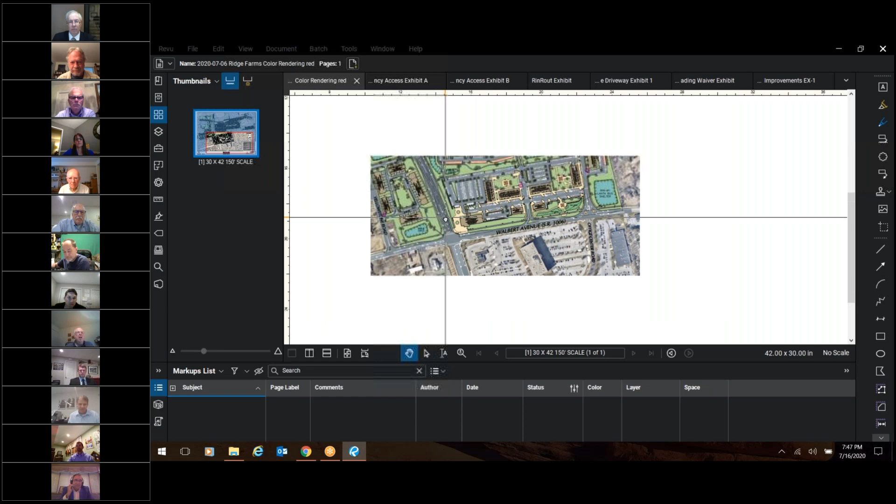I just want to mention a couple things about the history. Would it be possible for me to have control of the screen? Probably, okay, it looks like I have it. Okay, so the plan I'm bringing up is the same one that Tony walked through a bit.

So just a little on background. The last time, or the first time we were in front of you with the preliminary plan, was at your May 21st meeting. At that meeting, we reviewed a total of 8 waivers that were requested. The first 8 waivers in the letter are the same waivers. We've made some modifications to those based on your comments, but the same general sections, the same order that we presented back then.

Since that time, what we did is we went through the many comment letters that we received on our initial submission from Public Safety, Parks and Rec, and your multiple engineers, as well as listened to your comments and others. We reviewed those documents, went through everything. In those letters, there were some items that suggested waivers would be required in numerous places. In some cases, we figured out a way to make an alteration to the plan to avoid those.

The last 4, so the 4 that are after those 8 that make up the 12, those are items that we didn't believe we could make a modification to, or at least we prefer not to make a modification. We think the plan's better as proposed, and we added those to the list. That's how we ended up with 12.

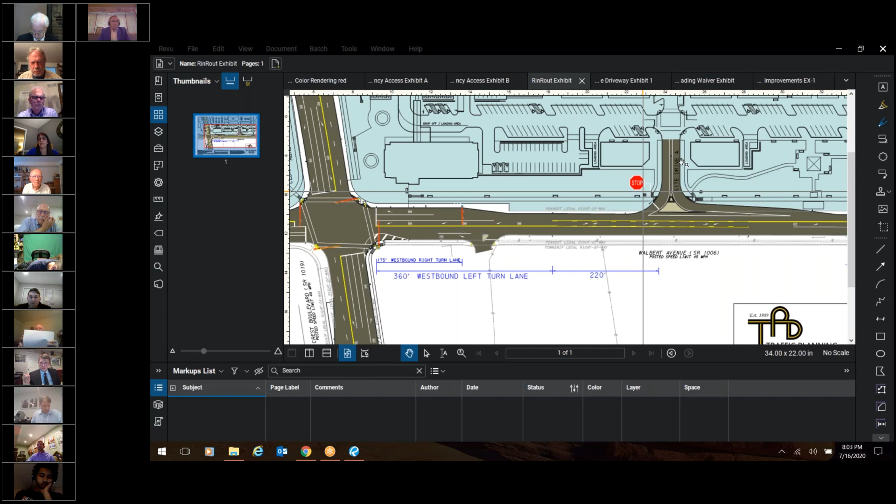Can you move this over, or are we allowed to see the following intersection there? We can get a full picture of what we're looking at. Sure, of course, thank you. Just take a minute to regenerate here. Put over a bit.

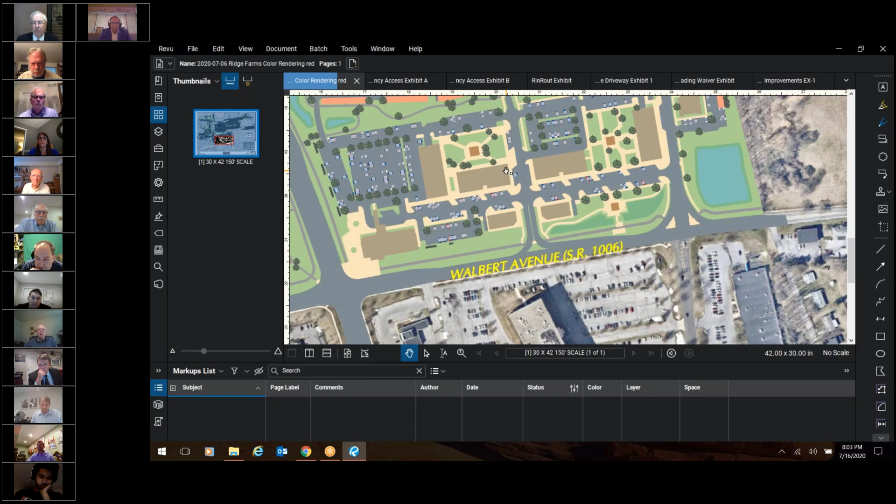So Office Center will be a signalized intersection. It basically splits the difference between the two, provides better access to those commercial buildings in the middle. That's correct. Better circulation. You've got about 1,450 feet total from the Office Center down to Cedar Crest.

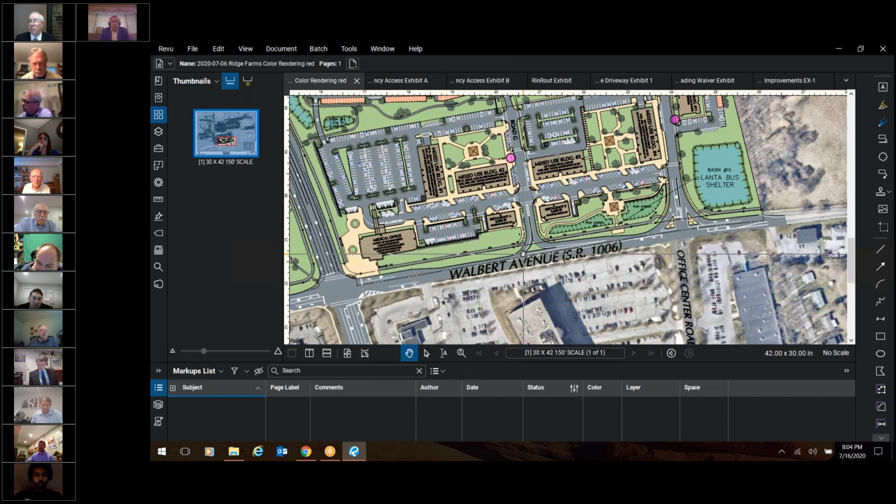And the location was chosen again. Originally it was a little closer to Cedar Crest, but there was a request to move it further east, which ultimately made sense with the traffic analysis that Rob did. Thank you.

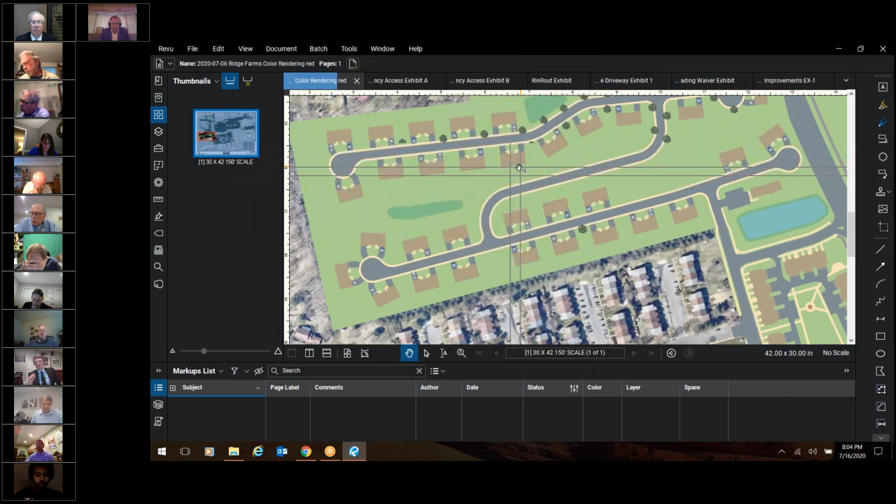Okay, so I'm going to move on if that's okay. As Tony described, items, our waivers 2 and 3 go together. We discussed those when I was here in May as well. They concern the length of, get it to regenerate here, the length of this cul-de-sac and the number of units associated with that.

At one point early on, when we presented early sketches, we had a connection out to Valley Forge Road, as was mentioned, and it goes back a few years now. There was a suggestion we probably shouldn't make that connection through. At the last meeting, we discussed that public safety had asked for an emergency access. I met with public safety recently, and they had asked me to look at whether or not an emergency access could be provided between the north and the south cul-de-sac, which would avoid any connection through to Valley Forge Road.

I think Tony had briefly brought up that exhibit that I shared. So there are some grade challenges here between these two cul-de-sac bulbs, but we did look at it enough today to know that we can make it work. It involves a few adjustments and probably adjusting the bulb grades a bit. But we feel comfortable we can make it work, whether it's through a direct connection the way I'm showing here, or a separate emergency access connection that would run through the center open space area. But it would still not have more than 400 feet of bulb length.

Generally, when you have a cul-de-sac longer, the reason why that section is usually in place concerns if you had a fire and it would block off access. So by having the emergency access connection provided, that usually addresses that issue. So I would think that we would look to try to incorporate the access I'm showing now in Exhibit A, but that's the intent, to address that concern.

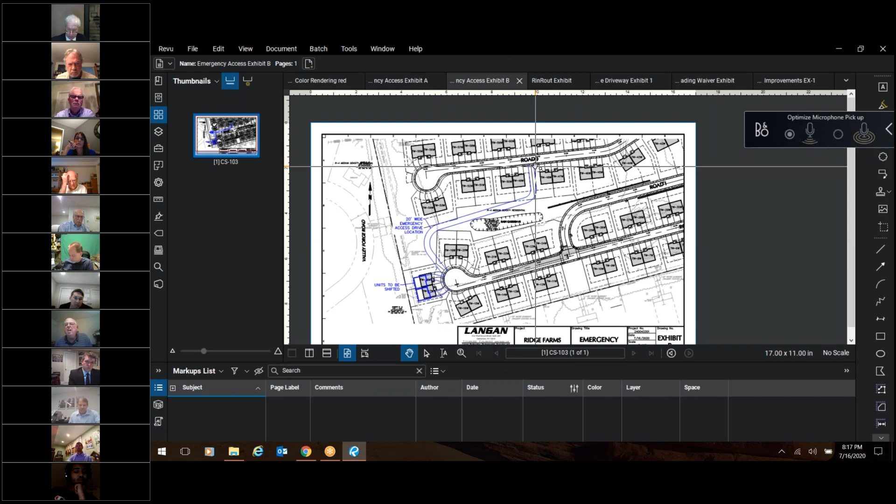If you didn't allow the waiver, I guess we would probably initially look at seeing if we can make a permanent connection to Valley Forge Road, which there was resistance to originally, or look at an alternate way to approach.

What about bringing that road in the middle there to connect those two, I'm sorry, I can't read it. To Road H? Yes. Let me go to the bigger plan. Bear with me for one second.

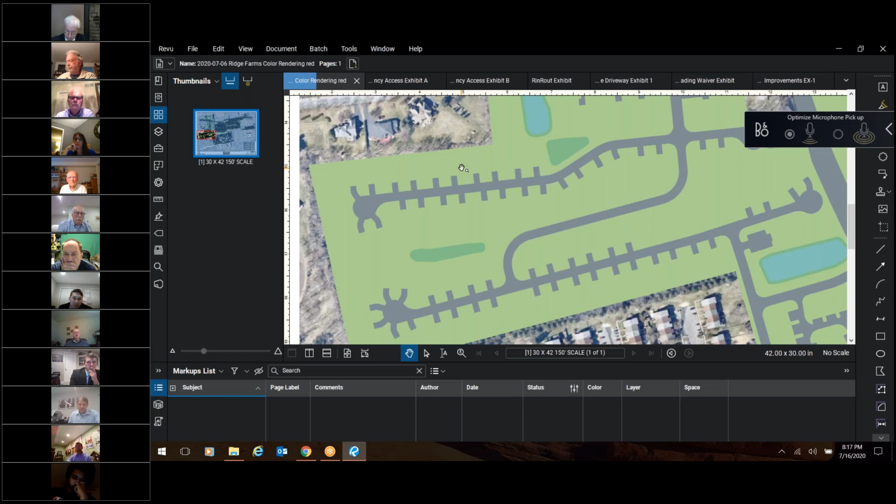Okay, so you're saying this road? Right, if that were to connect to both of those, road H and J, to make an intersection across there. Again, you have the same grade issue. The reason this road is as long as it is and routed the way it is, is to catch grade. So you need this length of road to address the grade condition.

And what grade is that road? I don't recall exactly, but it meets the ordinance. I don't know if it was 6% or 7%, but it wasn't more than 7%, which is what's permitted.

So should I move on to the next one? Yes, thank you. Okay, thank you, so that was 2 and 3.

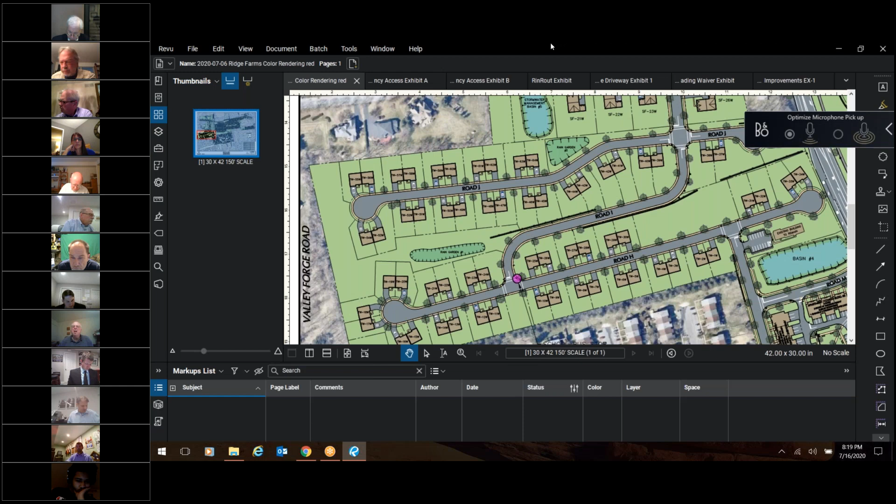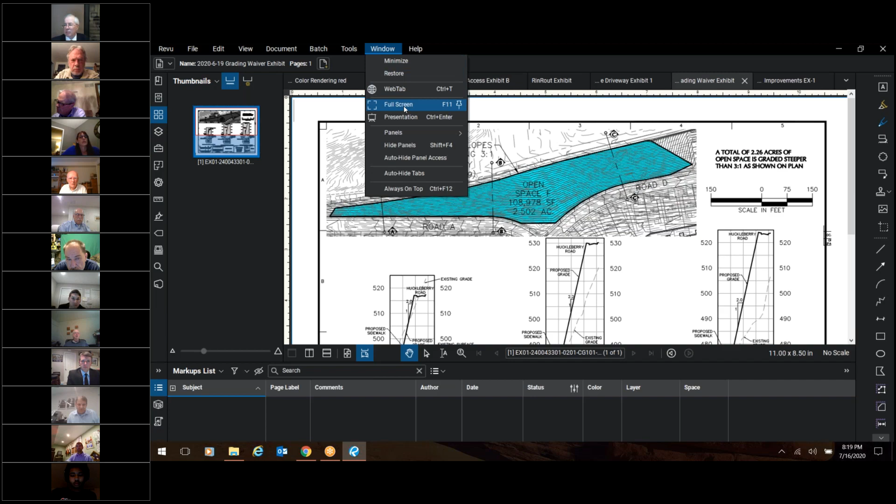Number 4 was the grading waiver. There was an exhibit that Tony didn't get an opportunity to present. So let's see if I can make this a little smaller, it's difficult. Go full screen. Okay, so there's a grading waiver requested.

There's an area of open space that had been discussed before. The ordinance talks about a 3-to-1 slope. We're requesting allowance to let us grade this at a 2-to-1 slope. It's about 2 acres of area total.

The geotechnical engineer had asked me to identify the area closer and provide some cross sections, which I did. The existing grade in this area is roughly 2-to-1. So if you drove out there today, depending on where you were on the slope, it varies a bit, but you can see in this section it's roughly 2-to-1.

So, you know, this is a situation - it's not an uncommon condition to grade at 2-to-1. There's a certain type of slope matting you need to provide. Your engineers may ask me to do some sort of stability analysis to confirm it will be stable.

The open space will be planted in a way that won't require a great deal of maintenance, because whether it's a 3-to-1 or a 2-to-1, you're not going to put a lawnmower on it. It'll be planted with something that stays in place and requires minimal maintenance, and it'll be on the homeowner association to maintain it.

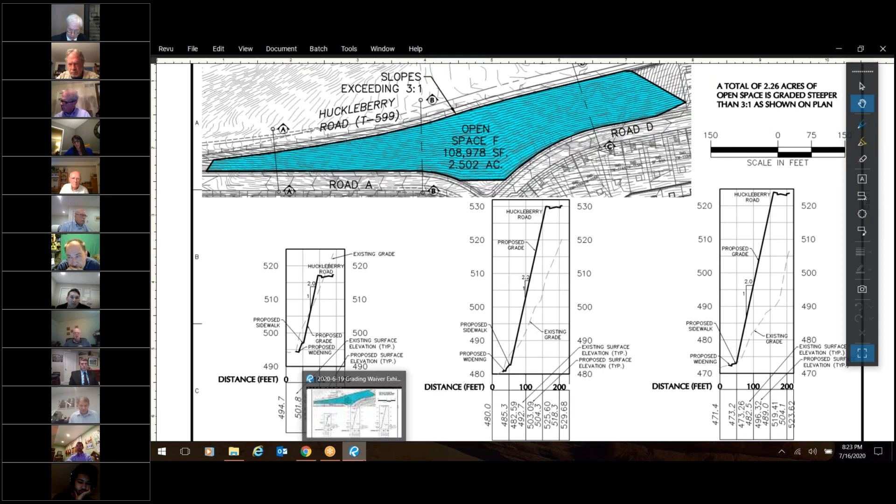So, yeah, okay. Okay, good. Okay, so I'm going to move on to the next one, if I can figure out how to go back here.

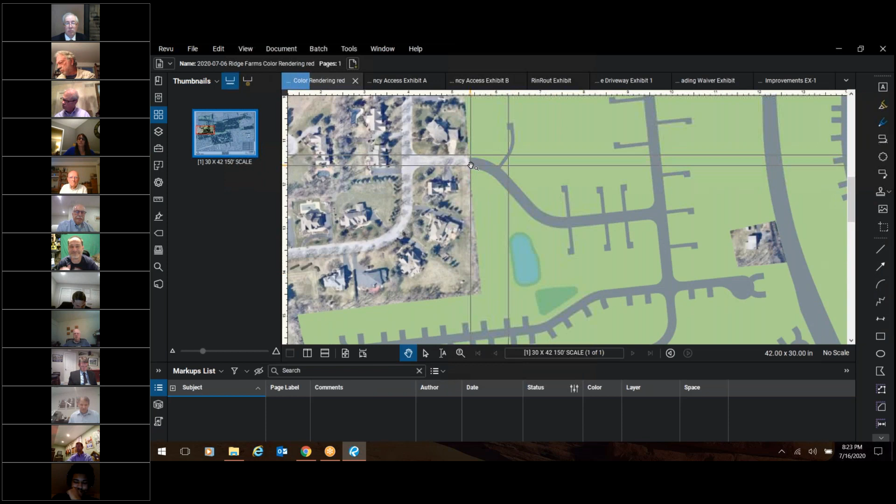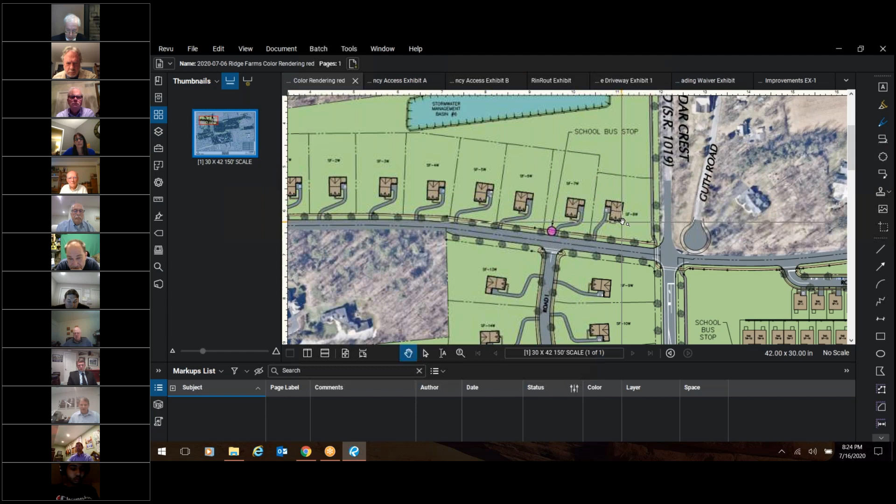Please bear with me. So the next one concerns Huckleberry Road and the west side of Huckleberry, and the improvements on the west side. The history there was the original plan submission I made in March. We had asked for a waiver from improvements of Huckleberry on the west side. We were on the east side, widening the full 4,000 feet, adding curbing and sidewalk. On the west side, we had originally asked for a waiver from improvements here, with the exception of providing sidewalk on the north side, mainly because there's not a great deal of traffic being added here. These are larger lots and not a lot of density in this area.

When we talked at that meeting, you had come back and said that you did want widening through this area, that you felt it was necessary. And we spent a little time talking about it because, I'm sure there's a reason for it, but east of Cedar Crest, this is a collector road. Everything west is considered an arterial, and I can't quite figure out why. Driving Huckleberry, knowing it's a 24-foot wide rural road, I wouldn't think you'd want it ultimately to look like Walbert.

But we went back and forth on this a bit, and ultimately what we came up with was what we put in the updated waiver letter, which was trying to accommodate what you were suggesting and provide a reasonable improvement here. So we provided the 40-foot width, the full right-of-way dedication should you ever want to make it wider, the sidewalk on the north side, the curbing, the stormwater.

So the waiver request really is two things that remain. One is to leave it at 40 feet - so it's 24-ish now, you get 40 foot of width here. And even at 40 feet, we're going to have to figure out how to make best use of that much pavement, so you don't have some of those safety concerns you were talking about before.

And then the other piece of this is the sidewalk on the south side, which, at least from the new roadway to the west, it didn't seem like there was a logical connection of sidewalk to the west. As we've been talking about this, maybe on the east side it makes some sense, but that's where that stands. So I'll let you guys discuss that.

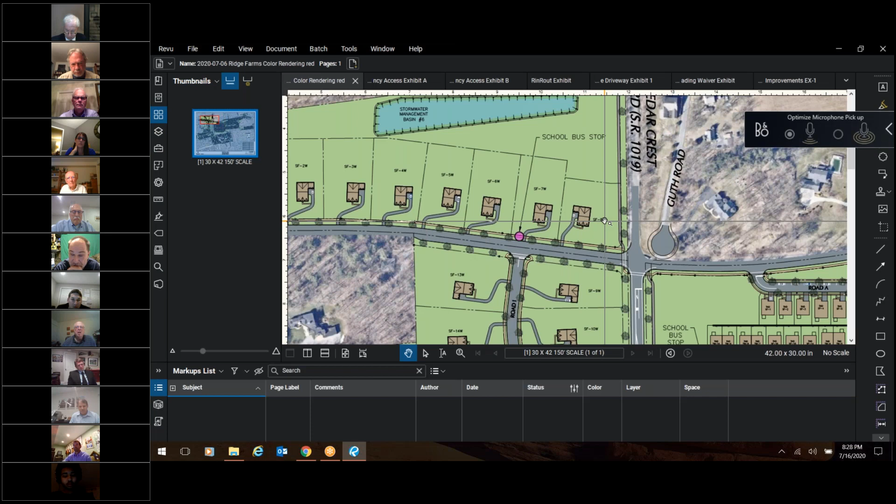So to build it to our standards, arterial, that would be 50 feet. I could see an argument for 40 feet just because of the location of the school bus stop and the children from the south having to cross that road to get to that bus stop. I could see parents being very concerned at even 40 feet, but at 50 feet, I wouldn't want my child crossing that road, and I don't have any children. So I could see a good argument for 40 feet, especially considering it's collector on the east portion, east of Cedar Crest.

This intersection at Cedar Crest will have a traffic signal. Yes, it's being reprofiled to improve the grade and the sight distance, and the signal's being added. So I also added this trail network along the property limit since you last saw it.

Will that trail be alongside the sidewalk then? The trail is independent, it's interior, further interior. A trail was something that Greg Adams had in his comment letter, so that you could extend it further in the future.

This is the thing you call an 8-foot wide walking path? Yes, that would just be north of Huckleberry. No, it actually extends on the entire east side of the property, so you can come down to the intersection. It'll be signalized, you have crosswalks, and then it'll enter the property and continue all the way down to the east.

Okay, so throughout the entire site, on the other side of Cedar Crest?

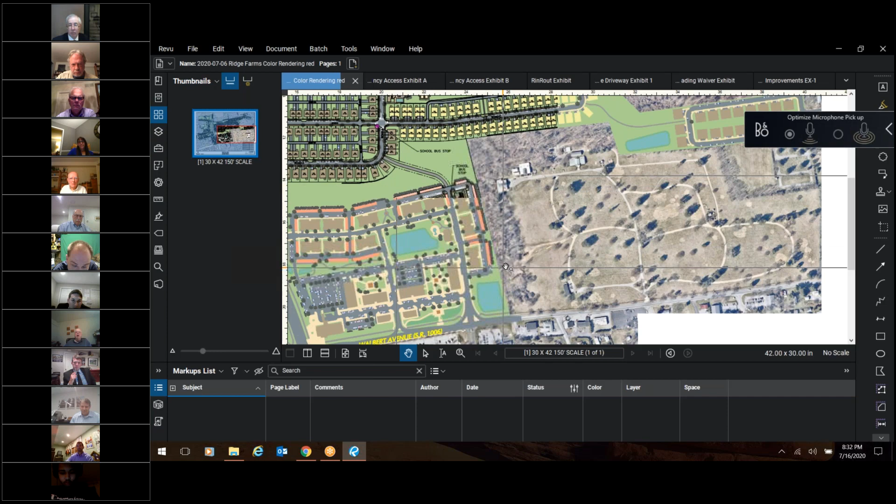So at your eastern boundary to Grandview Cemetery, where the two properties meet, you have a walking path going - is it going to connect into the sidewalk there that's currently in front of Grandview, like right behind, right in there? Yeah, that's the intention. So then Grandview Cemetery, who we've been going back and forth with on the condition of that sidewalk, they could say, well, we're going to rip the sidewalk out and pave it as asphalt to match your project. And I don't know if that's something we're really looking for, but that's just my opinion.

Brian, that's kind of a separate issue. We already have an open land development for that cemetery that does require some frontage improvements there. And we also have the Abatia project, which has been on hold, but that's another one where we can get improvements there. So I'm not quite sure that the cemetery can simply say, well, we're going to put in asphalt.

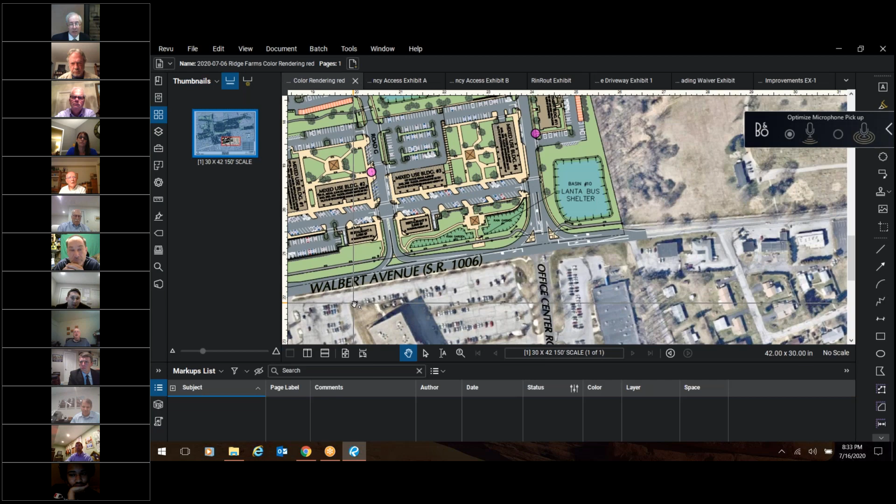That's a different animal. I just get concerned about the asphalt not holding up over time, and then it deteriorates. Right, especially if the HOA is responsible for it. Sorry Dave, but Greg, do we have any other walking paths in the township that are of this construction?

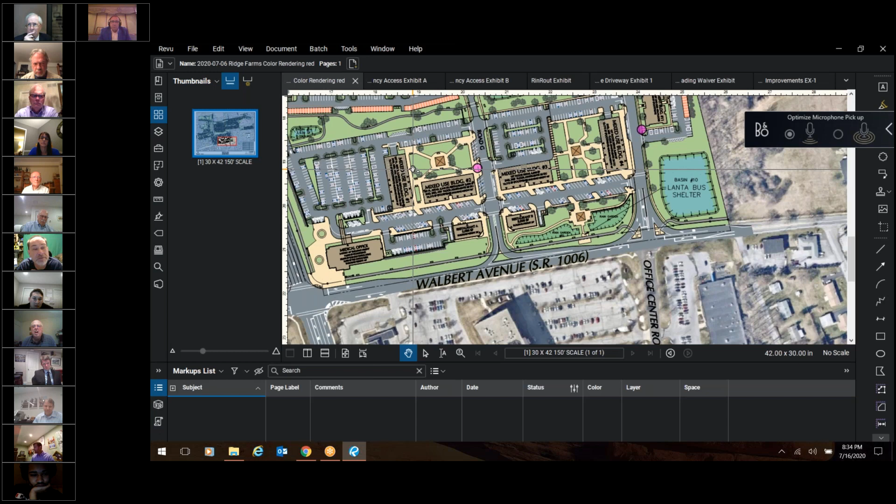I can't think of any. I remember the Cetronia ambulance wanted to try to do that, and we decided against it. We wanted a continuation of concrete from the underpass of 309 there. Yeah, right, that's the only spot in our township we've allowed this. That's all sidewalk through there, so that's all concrete. Wow.

I don't want to say no. Right, neither do I, that's why I asked. I could only offer that I know there's township details for the trail we were asked to follow. Were we not promised a walking path around the park on Broadway where the ambulances are located and where that wonderful new building is built? Yes, that's the case. That is on their property.

Right, and we were promised asphalt walking paths. That phase has not come to fruition yet. Because that's part of the Lehigh County fields and that kind of stuff, isn't it? Yeah, that's internal to their project. It's not within the right of way per se, or along a frontage of road, not along Broadway. We put Portland cement in there, or concrete, I should say. But Brian, I believe the walking paths were meant to be in lieu of sidewalk along Broadway.

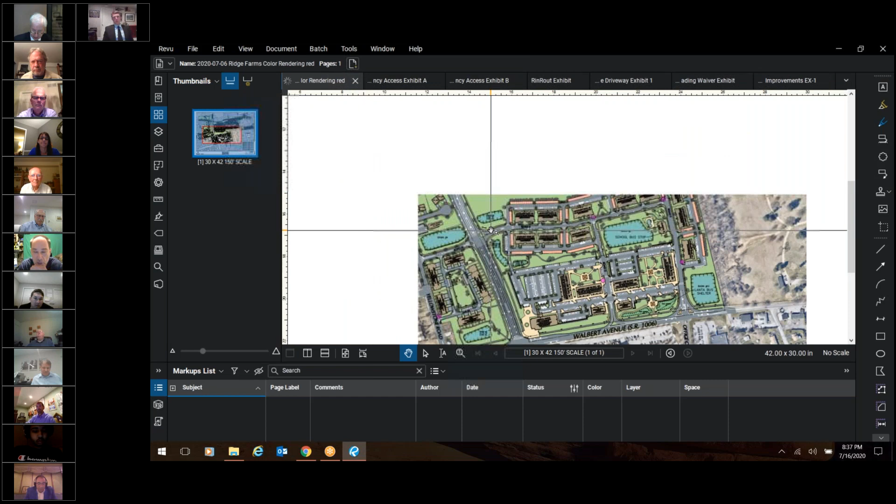Okay, so just to jump back to the waivers. Are we done with the Huckleberry waiver on the road width? I'll move on to the next one.

Okay, so the next three all relate to stormwater. I know Tony touched on them before. I think the easiest one to get out of the way is the issue of a flat bottom basin. Tony and I were talking about this today, and honestly, there's a code section that requires a 2% slope on the bottom of a basin, which is a fairly common code section that most ordinances have pulled out at this point. Although I still have to ask for the waiver often because it's not all of them.

So the old grass-lined stormwater basins from 20 years ago had a slope to the bottom, they were just mowed out basins, there for peak rate only. These days, whether it's an infiltration facility, which these are, or a wet pond, or a wetlands planted bottom basin that all provide water quality elements, they all need to be flat bottom. So it's a fairly common practice, and again, it's not uncommon that I have to ask for the waiver because a lot of ordinances still have that requirement in it.

But there were some questions on the geotech on all three of these. Their questions really dealt with infiltration capability, but the physical structure of the basin, having the bottom be level, I wouldn't think would really tie to that to a great extent. Well, it's actually typically required and recommended that it's flat for infiltration facilities.

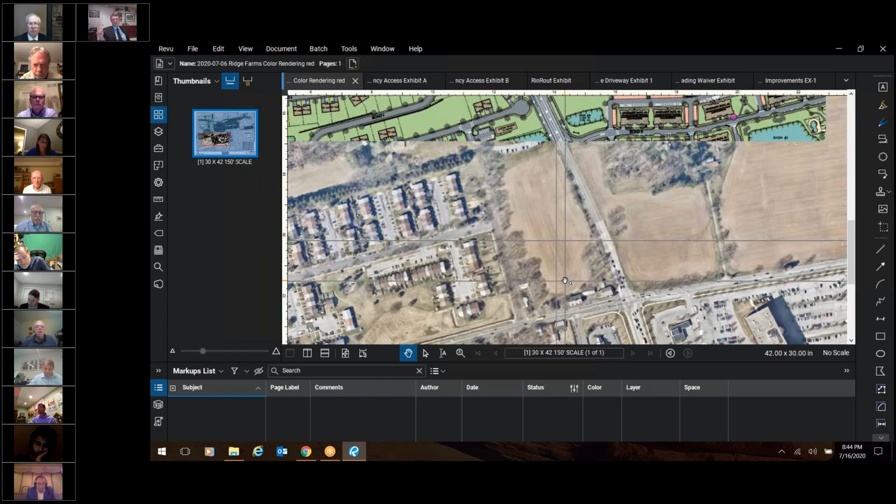In which particular basin was that? Basin 3. Now, I can tell you where basin 3 is. I think basin 3 is down in... closest to Walbert, I think. Yes. Basin 3. That's the deepest one, potentially the deepest one. Thank you - corresponding depth.

In terms of maintenance, some of these ponds are pretty big, and after some time you do need to perform maintenance, and you may need to get some equipment down there. I just have a concern that when the HOA is left to maintain these basins, and then 5 years down the road they need to get a machine down there to clear out some stuff, they can't get down the 3-to-1 slopes.

Yeah, we'll grade in an access way so they can get equipment in there if they need to. We'll have an area that's flatter than that so they can get equipment in, although the intent is not to bring in equipment very often, we'll give them the ability to do that.

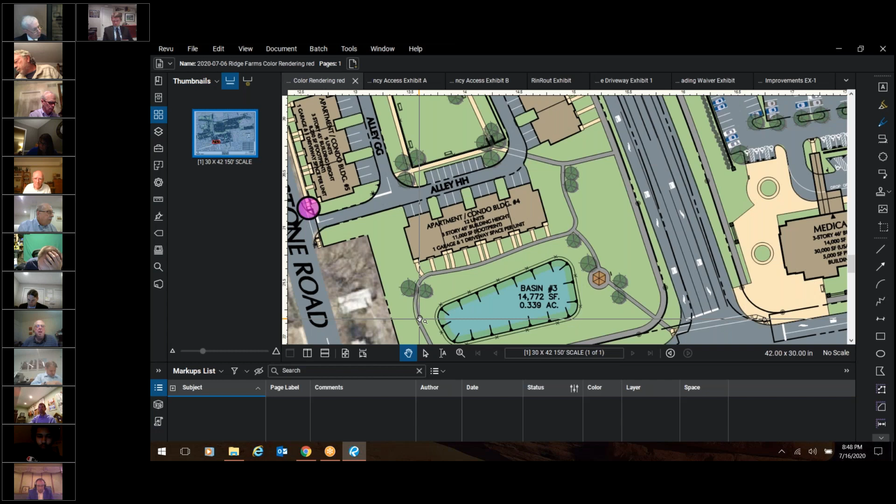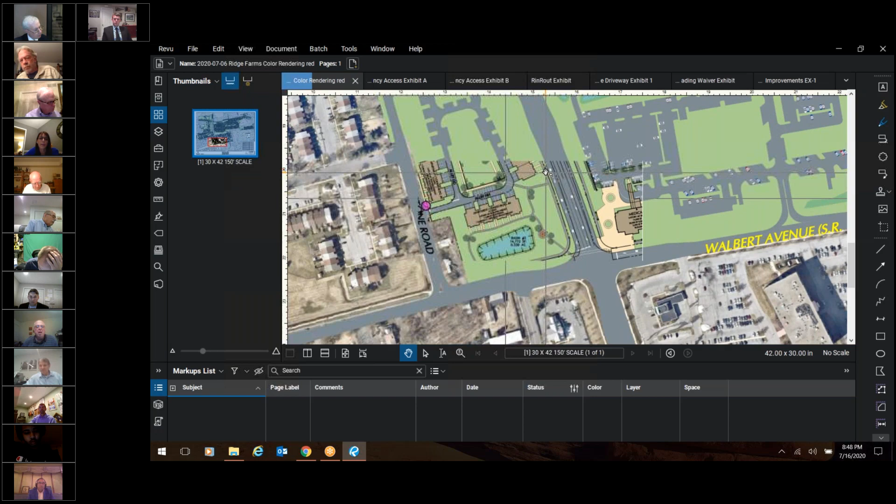This is on page 102 in our document. Yes. Basin 9 is 48 inches total. So that would be another one that's close. Can you give us a close-up of that one as well? Yes. And figure out where it is.

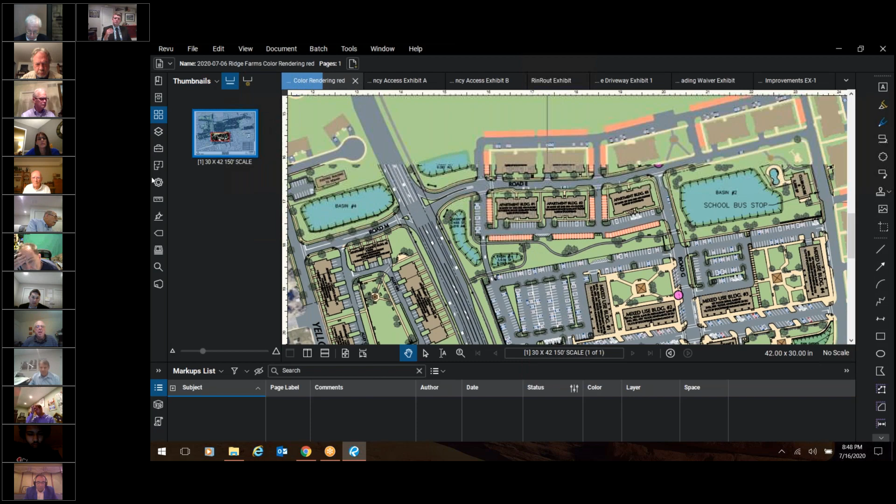Basin 9 is down the hill behind the cemetery. Okay, and that one's 48 inches. Yes, 4 feet in the 10-year storm. 48 inches, yeah. Okay, and they're listed there. And then the next one is 40.7, about 41 inches. Yeah, they progressively drop from there. Basin 4. Okay.

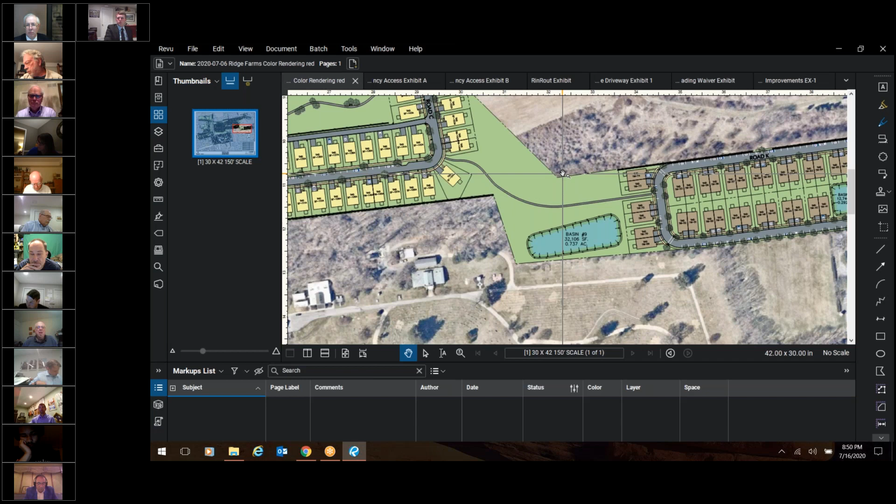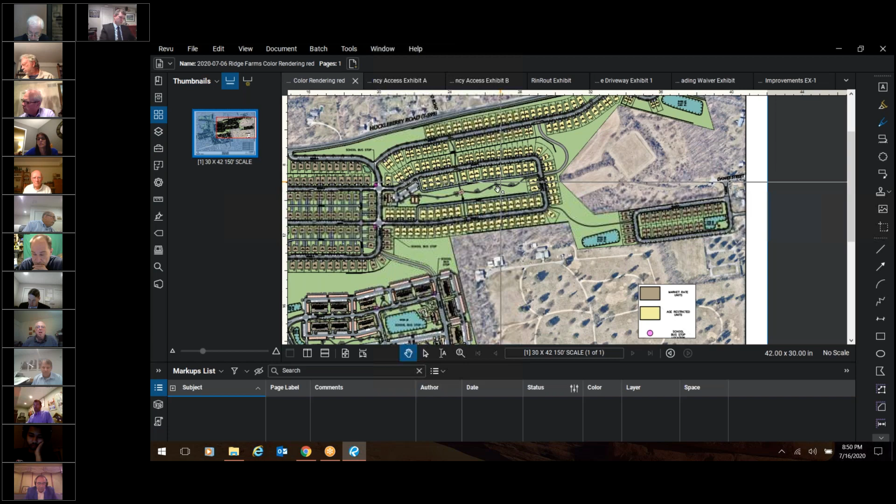You know, I've seen basins that have ponding water more than that. My main concern is the safety. A fence can take care of that, and then maintenance, providing an access way. Okay, and so the maintenance and the safety can be handled by fencing and access way. Yeah. In my opinion, the depth -- I've seen a lot of basins that have more depth than that in terms of ponding water. Okay, go to the next one. Let me hold on one second.

Jason, just to go back to the basins, you're envisioning all these to have plantings for water quality and all that, not just grass? Yeah, the one thing I learned is to make sure the homeowners association knows that specific plantings are meant to be there and shouldn't be weed whacked -- I've learned from my mother-in-law. Yes, that's a good comment, and there'll be a maintenance plan with it. Gotcha, okay. Sometimes they don't like cattails and want to go in there and whack away everything, and it's not good. No, that defeats the purpose.

I agree. Jason, correct me if I'm wrong, but these would be part of the MS4 requirements, which the township would then oversee. Tony, do you want to answer that? Mike Elias is the township's MS4 coordinator, but these basins would discharge to the South Whitehall Township system. I believe there's a set of notes and requirements -- anything that discharges to the South Whitehall Township system has to provide yearly reports, maintenance schedules, items to show the township that maintenance is being done, they're still functioning, and they're constantly being inspected so there's no issue, sinkholes or blockages or things that would harm the township and their waters. Okay, thank you. So it's pretty much an extended maintenance agreement with the township.

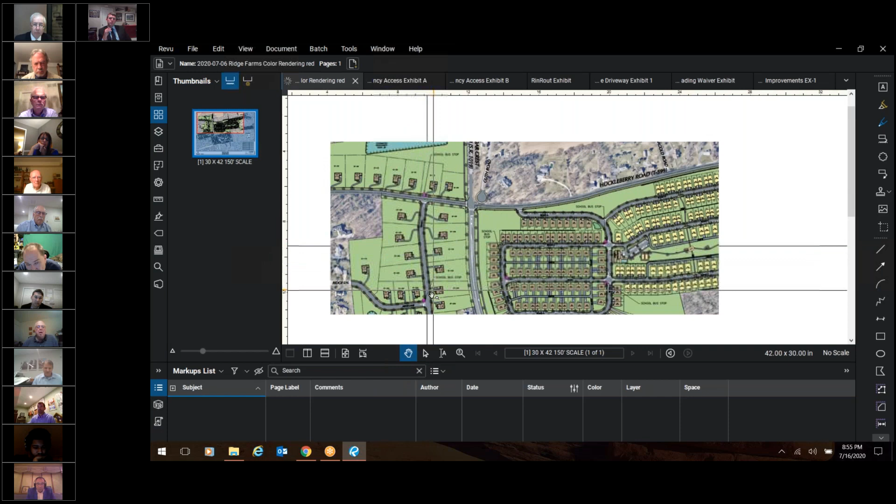The school district wants it as their school bus pickup. The alternative, if we weren't permitted to have the access, would be a cul-de-sac here, which I think would force a lot of traffic out through the adjoining development. So we think it's a better plan from a connectivity point of view to have the access point here. The classification on paper changes, but the functionality of the road doesn't change from the east side to the west side, and in fact, there's a lot less traffic on the west side.

Are there any questions on that before we move on?

I had a question on the number of driveways on the opposite side of the road there. I know with Blue Barn, we asked the developer to make one road in, and then the houses had driveways off of that so there weren't so many access points. There's an awful lot there, and the slope of the road as you get over there makes sight lines a little bit tricky. So has some consideration been given to that?

The original plan here, when we were originally looking at sketches for this property, did propose a road in. The problem became that Huckleberry itself as a road is already at 11% through here as a grade, so even with a longer road internal to the site, we couldn't meet the road grade that was permitted.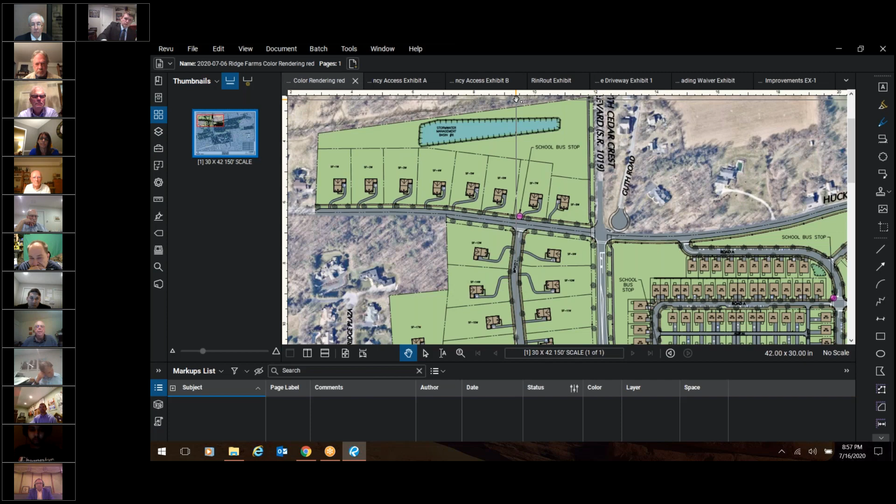Okay, so I will move on to the next item.

The next item concerns the two cul-de-sacs that were discussed earlier. Based on the way your ordinance measures a cul-de-sac from the throat back, they're less than the required 250 feet. As Tony pointed out, the ordinance references liquid fuels, and the way PennDOT measures the road cul-de-sac, these would meet the definition, even though they're a little short of the 250 feet. So the way the township ordinance measures it and the way PennDOT measures it, they would be acceptable for liquid fuels.

So the northerly cul-de-sac, both of them only have 4 units on them. They have adequate sight distance and driveway separation. The lower cul-de-sac, we're constrained by the extension of Yellowstone and the limit of Cedar Crest. We're only a few feet short of the requirement. The northern one, we're a little shorter than that, but we thought the layout makes more sense with the units off the backside than trying to lengthen the cul-de-sac arbitrarily and putting the units below that.

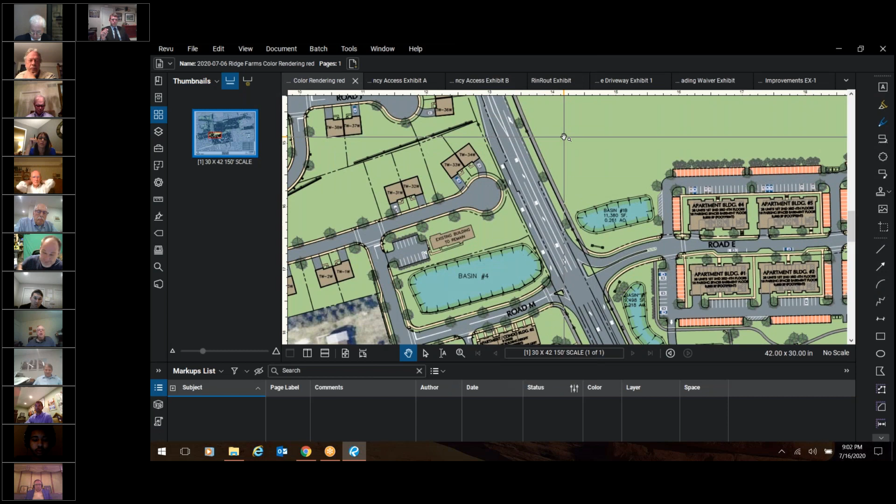You don't want to encourage them away from the highway, because there's 6 lanes of traffic there. So it's like, yeah, you don't want that. Understood. Thank you. We can do that.

Okay, so we're getting towards the end here. This same area, this road I, there's a waiver request here for this radius, and this radius are both 100 feet, and the tangent they tie into are a little short. So that's not uncommon to a number of the waivers granted in conditional use on the east side of the project.

The 150 feet is the requirement for a local street. This works for a 15-mile-an-hour speed limit, and it lays out as a better plan here.

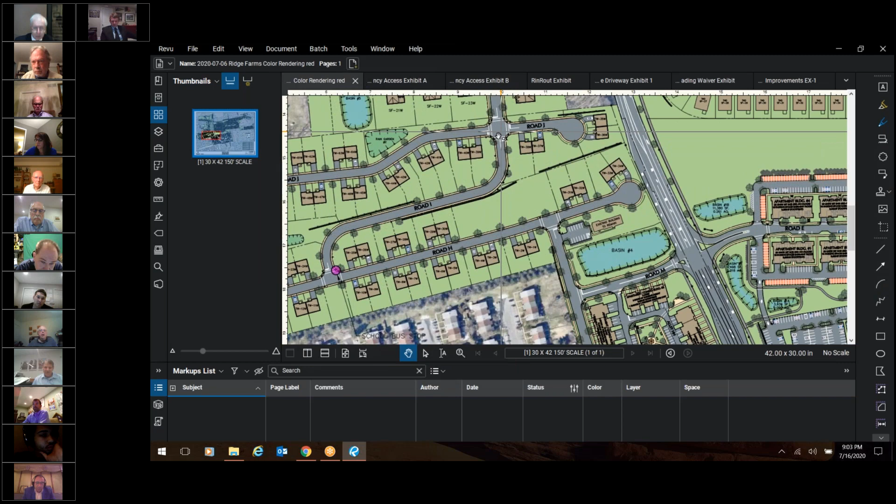There was some concern, I think, because the roads on the west side of the site were offered for dedication to the township. Everything on the east side is proposed to be private, as well as the development all the way to the southwest. But these upper roads were intended for dedication to the township, and I understand there is some concern with the radii, and probably even more than that, the retaining walls on either side. So the developer is willing to leave these as private if the board feels that's a better condition here.

But the waiver request is for the radius. It's a safe condition and works for a 15-mile-an-hour speed limit around those curves. It's not uncommon to some of the waivers that were granted on the east side of the project.

So the winding road somewhat acts as a traffic calming device. The other scenario is if they're going too fast and then they get out of control. Yes, it should act as a traffic calming measure. You do have some other intersections that will slow them down as well. You don't have a long run.

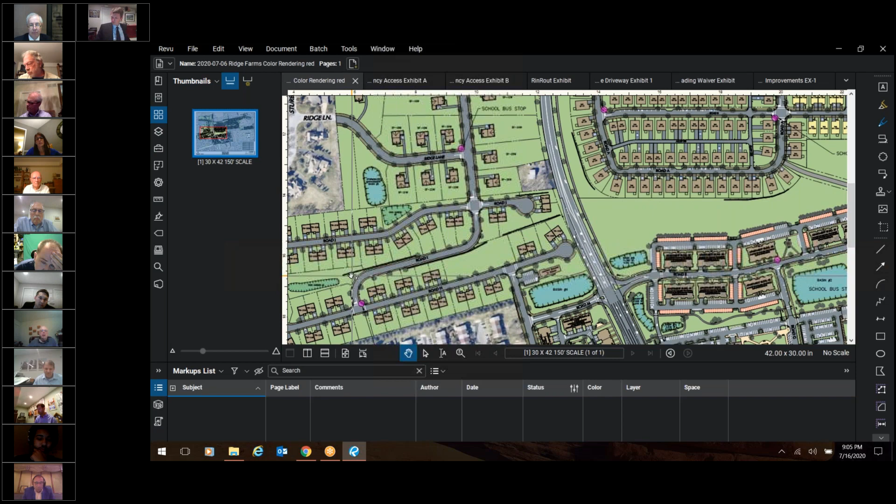So I think the concern from public safety is more about the retaining walls and whether or not they wanted a road with walls adjacent to it, or leave that with the developer, and less about the radius. So if they would be private, would all the roads shown be private, or just that one?

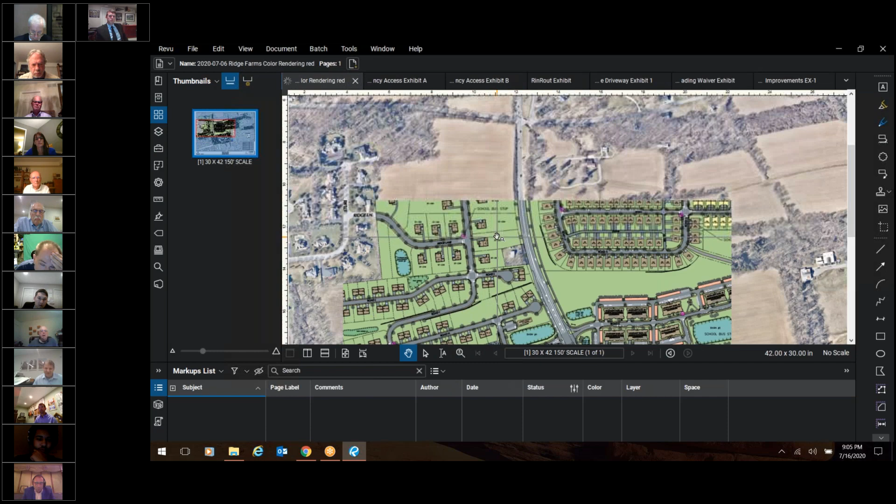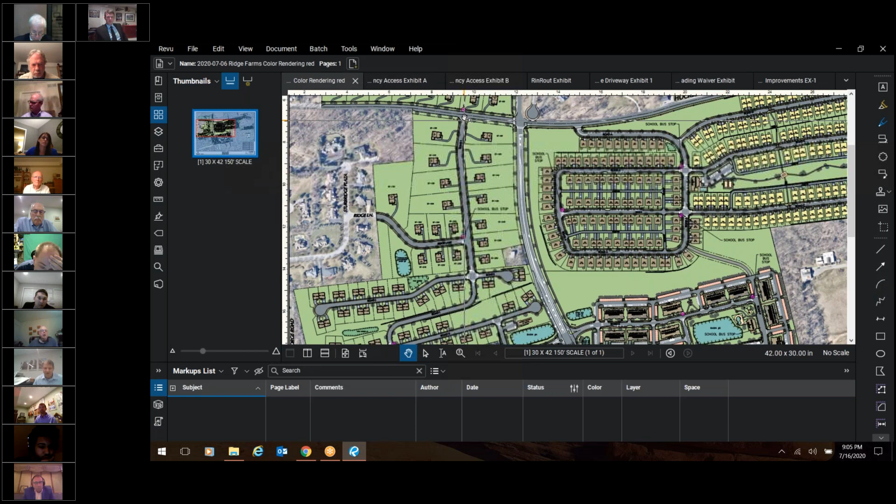What I had, and this is subject to your and the board's discretion, but what we had talked about was potentially leaving, extending the public from the extension of Ridge Lane and up Road I to Huckleberry. We would still offer this for dedication, what I'm outlining, and everything south of that would be private.

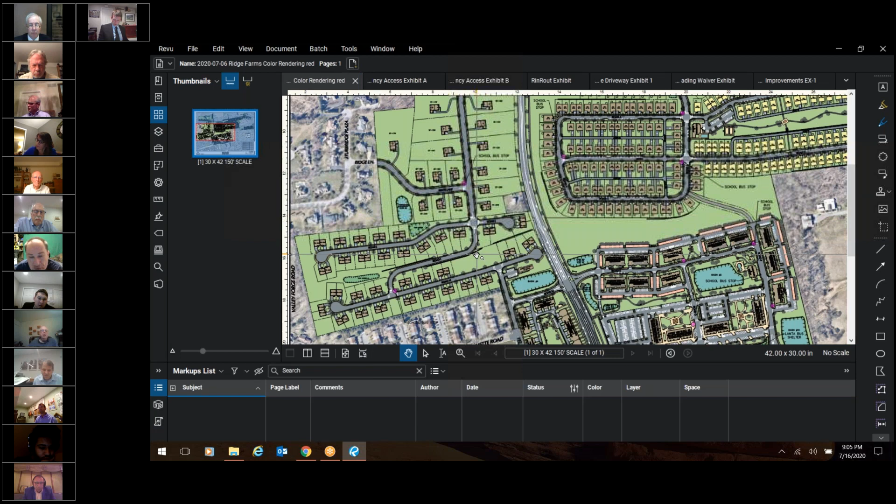Okay, so that would take those cul-de-sacs as well, as well as the piece of road through here. How wide is that road? What is that, IJ, whatever. The windy road, the one we're discussing. How wide is that road? I should know the answer to that off the top of my head.

It does get narrower. It uses the alternate section that's allowed by ordinance. I don't know the width off the top of my head, but it's narrower than the road north of that. Yeah, I saw that, and that's also a traffic calming thing too—you keep it narrow. I want to say it's 28 feet, but I have to double check that.

And it's sidewalks on both sides? Yes, everything has sidewalks on both sides.

And the retaining wall, what elevation are we looking at there? They vary, but it does get—I'd have to pull up the grading plan—but it does get over 10 feet in some locations.

Is that a drop, or is that? Yeah, you're climbing up the hill as you come up here. Yeah. So yes, okay, it is a drop.

I'm assuming there'll be some guardrail. Yeah, absolutely, it'll be a safe condition when we're done. It's just a maintenance concern, I think, that was brought up to me.

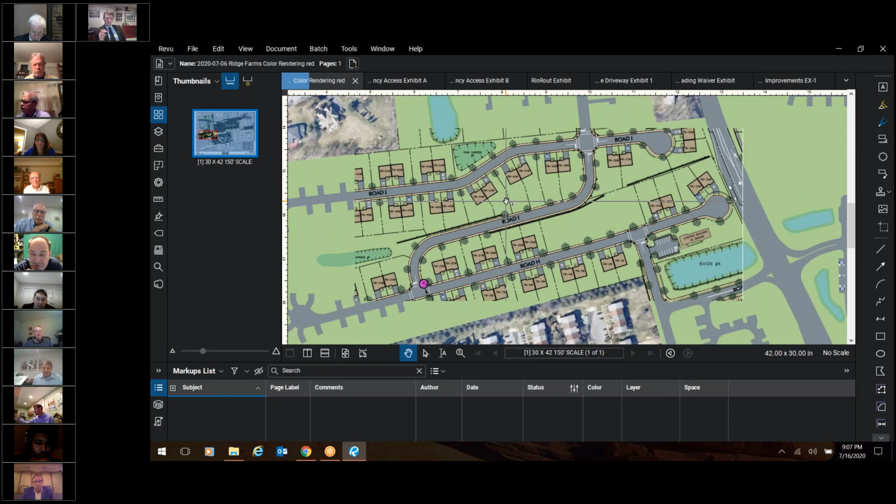Is this residential aspect considered going to be under an HOA as well, or not? The whole project will have an HOA. Whether or not the commercial piece will be part of that same HOA or a subset of that, it'll be covered. Because if they're going to be private roads, you almost have to have an HOA in order to pay for that maintenance. So that's why I was asking. Yes, and you've got open space that has to be maintained and stormwater basins, so it'll be a substantial HOA.

I do like the aspect of the township taking control of those two other roads, but the private option is probably a good idea. So, okay.

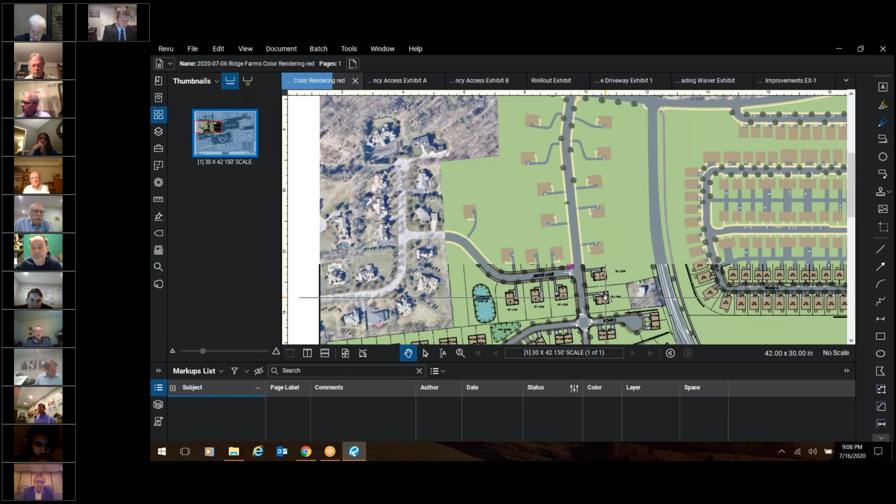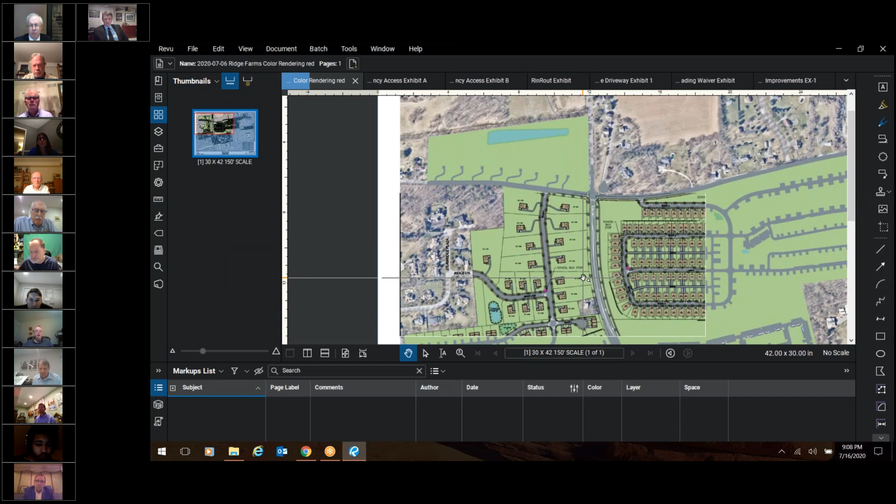Just a slightly different question for you. Where the road comes from your development east of Cedar Crest into Cedar Crest, will there be a traffic signal at that intersection? Keep going a little bit north. The only traffic signals proposed are at the intersection of Cedar Crest and Huckleberry, and at our main access way at Office Center Drive.

So there will not be a traffic signal proposed at that spot? No, I don't think we would. Rob could speak to that, but I don't think we'd meet warrants for any other signals. That's correct.

Wasn't there originally several years ago a traffic light proposed on Walbert? I can't think of the name of the road now. Is it Valley Forge? I'm not sure, west of this project. Wasn't it Brandywine? Yellowstone? It was Brandywine, I think. What happened to that? I remember when we were going through the conditional use, there was talk of one going there, and now it's gone. As the plan evolved and the traffic flow evolved with it, the warrants were not satisfied for signalization at that location.

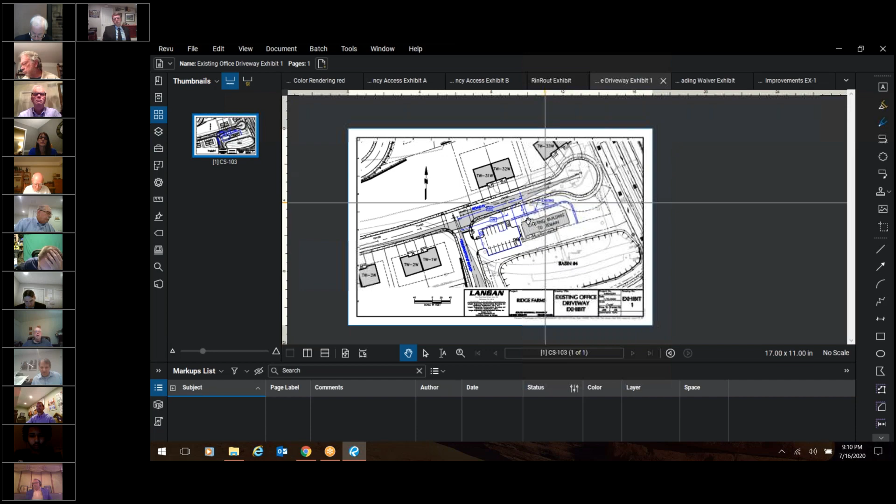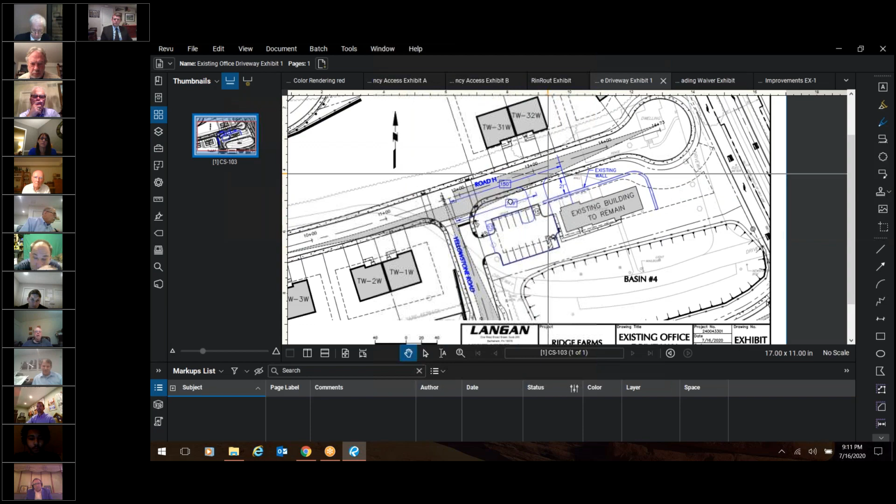So I guess I could move on to the last waiver. I have an exhibit for that. The last waiver relates to the parking lot for the existing office barn that's being preserved. There's a waiver requested for the parking lot separation off the intersection. It was suggested that we look at taking that access off of the cul-de-sac bulb, which makes some sense because you've only got the four units using that. We sketched that in here to show we'd still need a waiver from the 150-foot separation because of the existing building location.

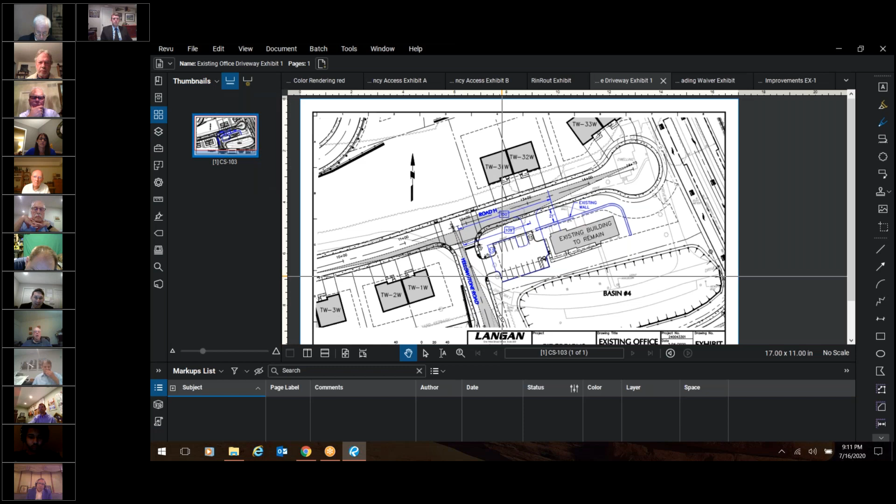We'd have to cut back a little bit of the existing wall there. But we can push the driveway out from 73 feet going in this direction to 109 feet going in this direction, and again, it's a less used chunk of road. So it makes sense to make the change if the board is supportive of that, but it would still require a waiver. Yeah, I think that's minimally used. I don't think it's much of a hazard or anything there.

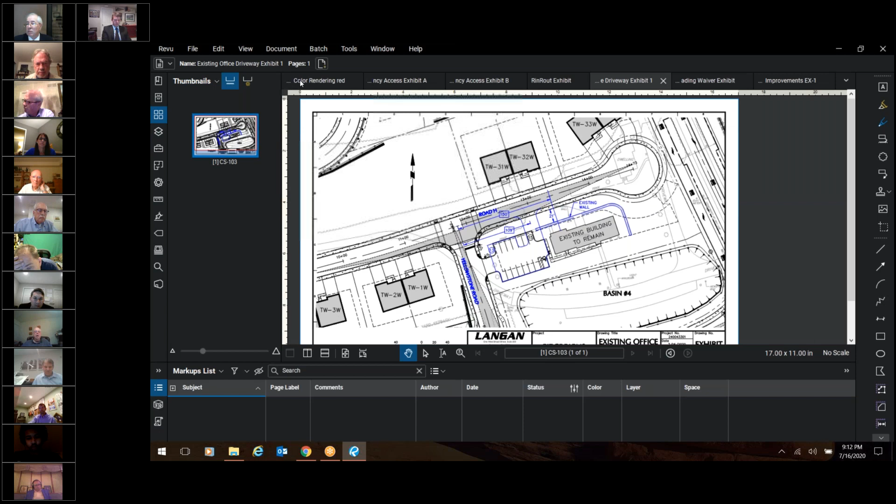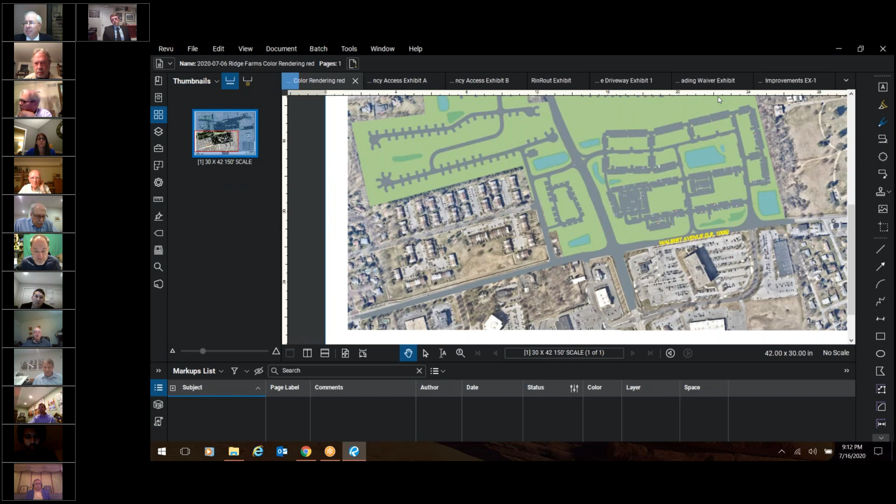Okay, great, so that's the last one. Any more questions from the Planning Commission before we go to the questions from the community? Okay, we'll go. How do you want to do this? I can take this one, Bill.

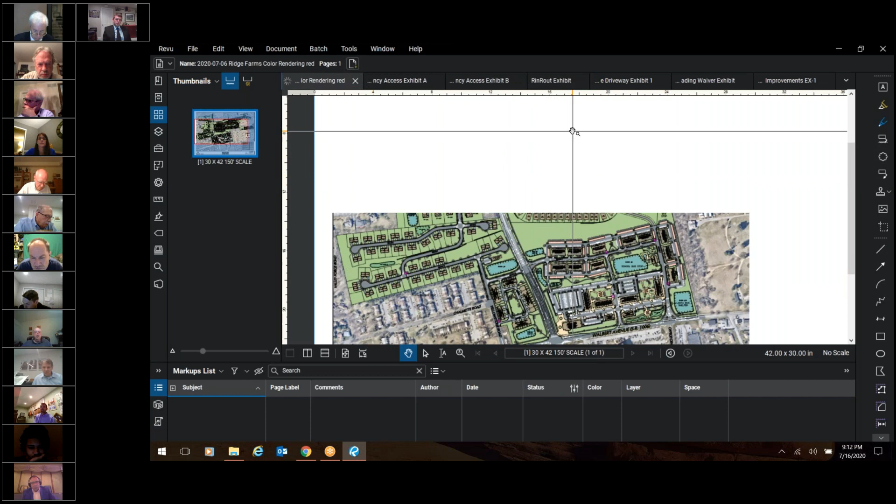Okay, actually, hold on, I do have one question. Maybe the lawyer knows, maybe Mr. Preston knows, maybe Engelhardt knows. How come we haven't gotten all our review comments from the various agencies you submitted to? Has there been any delay from the LVPC, the Lehigh Valley Planning Commission, or the Lehigh County Conservation District? It seems like if we saw this first in May, we should have gotten comments back by now, I would think.

I can answer part of that. Actually, I can answer both parts. As far as Lehigh Valley Planning Commission, when I filed the application with them, there was some back and forth on the check - we actually paid them too much, and I had to replace that, which happened fairly recently. So you should get review comments from Lehigh Valley Planning Commission before the next time we meet. And for Lehigh County Conservation District, we haven't filed an NPDES application yet, so when we do file one, you'll be copied on that submission and get those comments.

Right, because I was just going through our packet here, and I understand the Pennsylvania Department of Transportation - you've been having dialogue with them - and our Landscape and Shade Tree Commission is going to meet on it soon. So I was just going through the bullet points. Yeah, normally you would have Lehigh Valley Planning Commission comments by now, but they are reviewing it now. So we paid them too much - we gave them too much money.

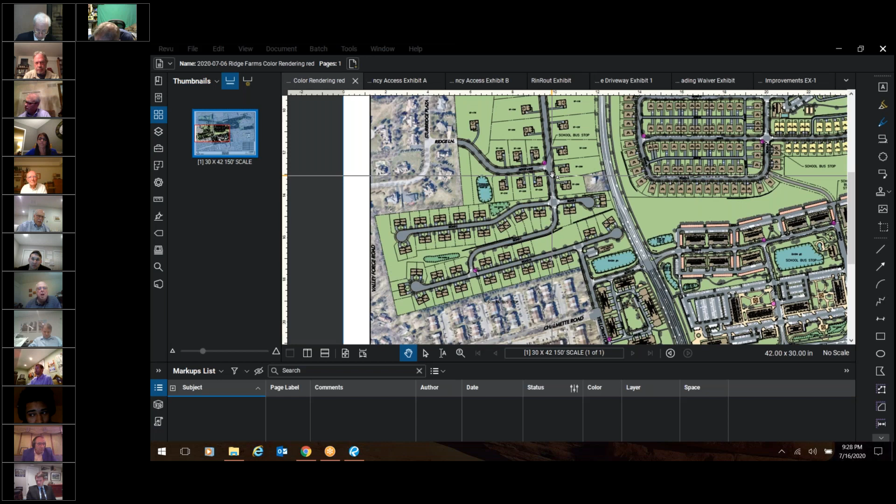May I finish off, since it was my statement that started that? May I make one last statement? Again, this is Robert Hodges. Mr. Preston, I appreciate what you have to say. And although you're under no requirement to show how any of these waivers benefit South Whitehall, I would say South Whitehall has no requirement to grant you any of the waivers. And so I asked the Planning Commission to think carefully about each one of them and consider what is best for South Whitehall and not for the development. Thank you very much.

Thank you, we'll go to the next. Next one is John Chaya, 2911 Huckleberry Road. His question is, where would all the water go from the slope? That was during the Huckleberry Road 2-to-1 or 3-to-1 slope waiver conversation. John, if you're out there, you can expound upon that now.

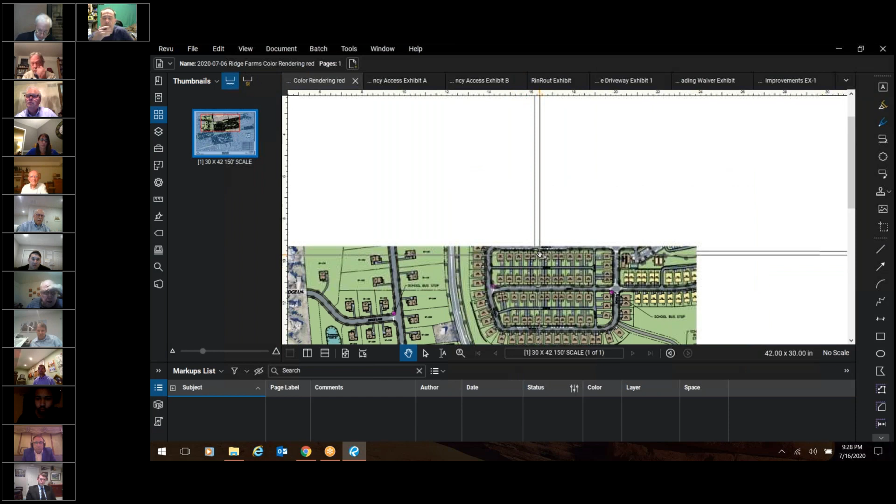Yeah, in the very first plan that we saw, that area they're talking about was a retention pond, and now it doesn't appear to be. And as we discussed in the overview earlier, that's a fairly marked slope there. My question is, where's all that water going to go? Obviously with no wall there, it's going to go right out onto the road or across the sidewalk. So I don't understand the reason why it was a retention pond first and now it isn't. That's the question I have, Greg.

Sure, yeah, I think at one point it was looked at as potentially putting a retention pond or a stormwater basin there. The grades don't support that. Huckleberry is being widened through here, with curb and sidewalk added, as well as storm drainage along that side of Huckleberry. So it'll be picked up in that storm drainage on the east side of Huckleberry. And again, it runs off there now, so we'll actually be picking it up, whereas today it's not — it just drains down to that road.

Yeah, it does run off in the wintertime. It covers the road with ice. So just a point of order. Yeah, and sure, no, it's a good question, and it will all be picked up in a new storm drainage system.

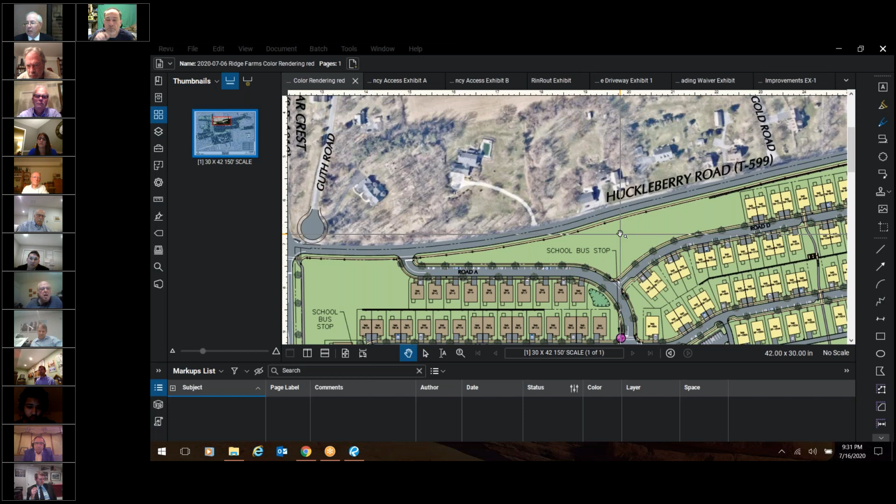Okay, next up, we have Cindy Smith of 2442 Huckleberry Road. Cindy writes, why isn't there a connecting road from Walbert Avenue to Huckleberry Road? And then she asks, what about the pavements? Does this affect everyone that lives on Huckleberry Road? And is anyone looking at the effect on Walbert Avenue? Will they widen Cedar Crest and Huckleberry Road to accommodate the increased traffic? Cindy, if you're out there, you can expound upon that now.

Hi, I'm here. I live on Huckleberry Road at the very top. Our property runs adjacent at the very bottom. This is what I wanted you to, so you could tell me. Huckleberry Road right now. Can you hear me? Yes. Yes. Can you hear me? Yes, we can. Okay.

Huckleberry Road right now is a dangerous road. At the very peak, because of the virus, FedEx, UPS, any delivery truck is not allowed to come up our driveway. So they park their truck on Huckleberry Road. And you know how narrow it is, and at the very top you can't see cars coming either way. I'm standing there waiting to call 911 because it's going to be a head-on collision.

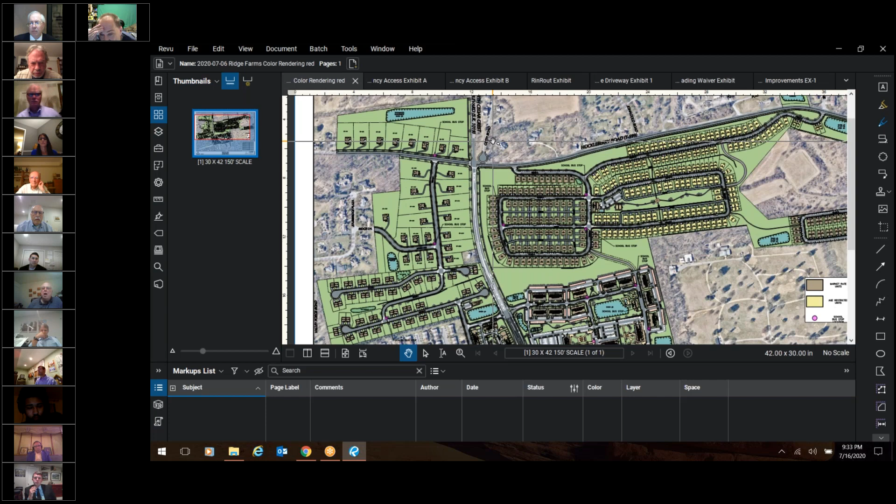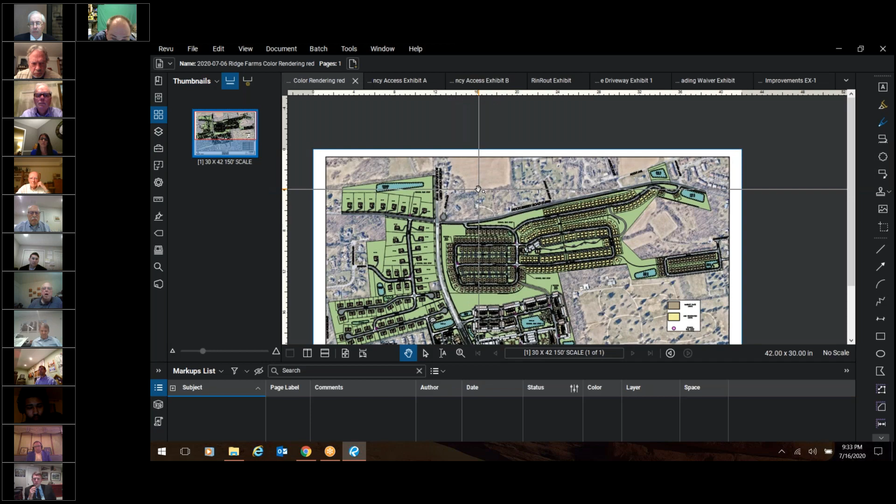When you say the very top, where do you mean? Where are you talking about? Around the curve up to the tip of Huckleberry Road toward Allentown. Okay, can you see the drawing? Towards the top right of the screen, are you talking? No, we're at the end of the property. Go down Huckleberry Road, and right where their retention pond area is, there's a wooded area, I believe, half owned by Allentown and South Whitehall, and then our property starts. Gotcha, okay. So what they're doing there is affecting us.

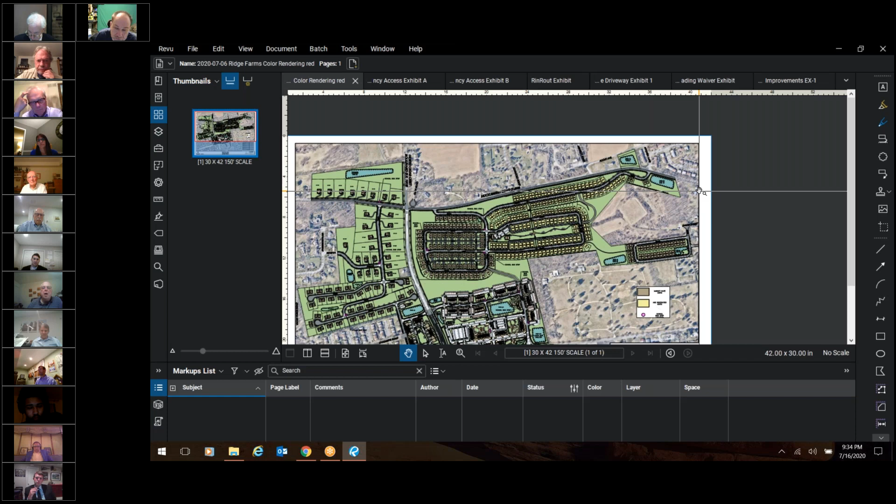You're actually east of the retention pond? Yes, towards Allentown, yeah. Right as you go around that curve, like I said, there's a small wooded area, and then our property goes all the way over almost to Dawes Street. So we have all that frontage on Huckleberry Road. Is your neighbor Robert Rue? That's my brother. Ah, yeah. Okay, okay.

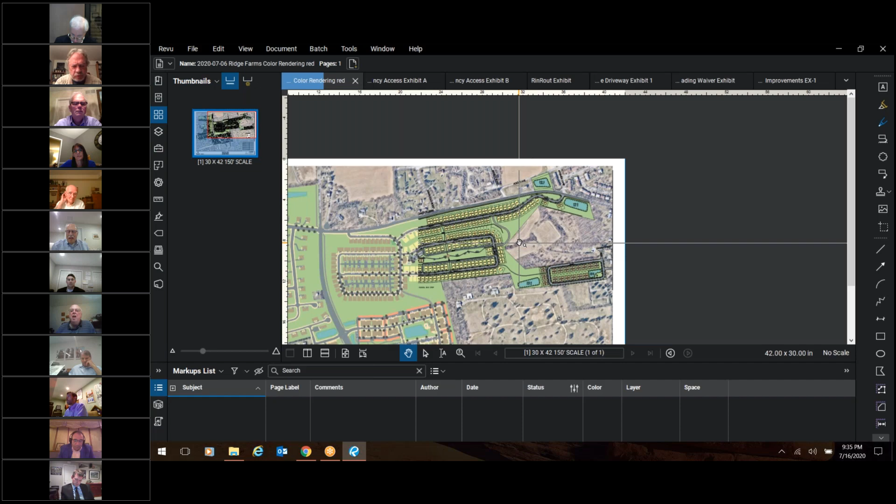Okay, that's going to be a, what's the term? It's a pathway, mobility, a mobility pathway or easement. We are asking them that to be designed as a roadway. I think we need to talk about that again, but I think we need to see what it looks like. And we may go through that again. It did not pass the Planning Commission the last time, which is the reason it was taken out.

I think it definitely should be looked at again because the congestion on Huckleberry Road, there's more people walking, there's more people riding bikes, which is a good thing. Unfortunately, there's nowhere for them to be, and cars have to go on the opposite side of the road, and that is a dangerous, dangerous thing, especially at the top of Huckleberry Road where we are. Because you have Fairview, Molinaro, I don't know what they call it now, but that development's right there. So all those people are using Huckleberry Road. So it's not just this development. There's, behind Sims Market, there's a point from Huckleberry to Walbert via Filbert Street. So why isn't there one up further connecting the two major roads?

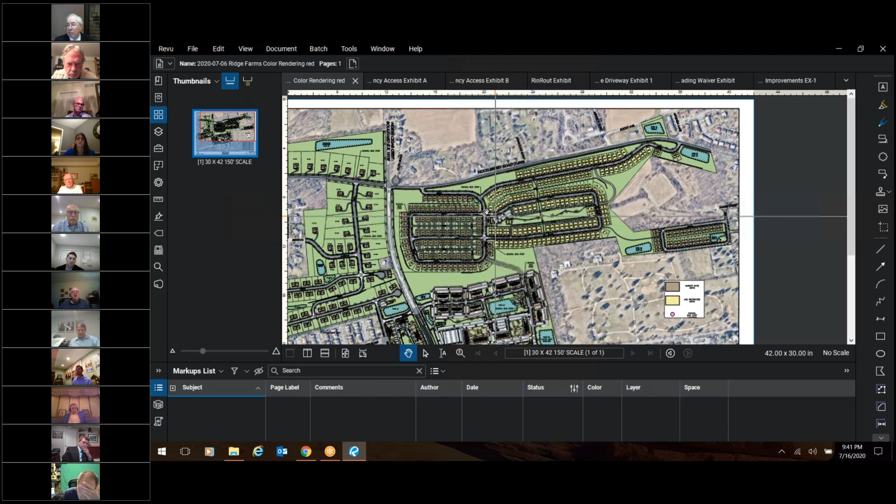So some of the stormwater on the top of the ridge gets diverted down away from Huckleberry and down towards Walbert. What remains, the stormwater basins located on the east side will pick up the majority of that area. So you're reducing the drainage to the north below what it is today by taking some of it to the south and the rest to the east.

And I'm sure I'll end up going into further detail on that at a future meeting that's unrelated to waivers, but when I have all those documents in front of me as we continue to work forward on this project. Okay, thank you.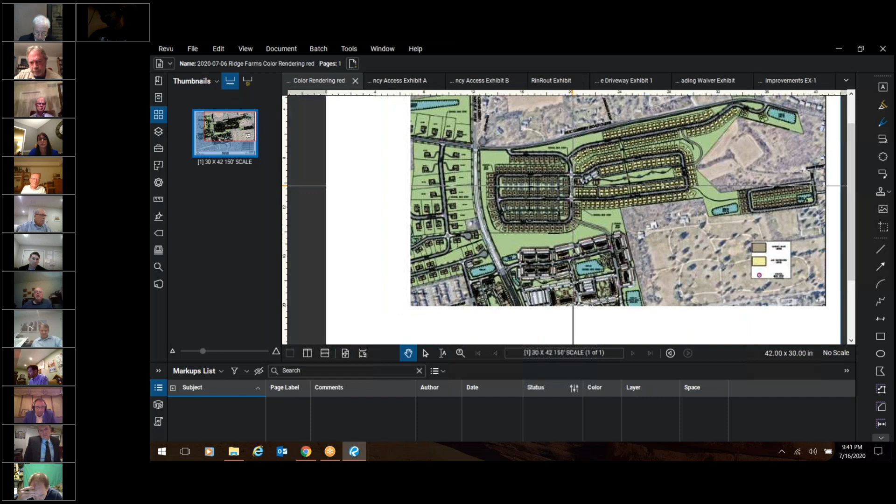The other question I had was concerning roads I, J, and H, that section. It seems like, from an emergency standpoint, for emergency vehicles and travel, you're asking for waivers — excuse my terminology, I'm not privy to all the documents and correct language, so excuse me if I'm not speaking correctly in your terms — but you're asking for waivers on the corners, waivers on the cul-de-sacs, and some of your roads aren't even the correct grade at this point.

That seems to me like if you've got a 15-mile-an-hour road with a fire truck trying to get down to the southwest corner of that area, in the middle of winter, in a storm, either through there or through an emergency easement that's there, it just seems like that whole section — I don't want to say poorly planned, but it doesn't flow very well at all, and it doesn't lend itself to emergency personnel or anybody getting in there to do any kind of services that need to be done.

So I think that whole section, with roads I, J, and H, is not a very good section for emergency vehicles to get through, especially fire trucks and such in the wintertime.

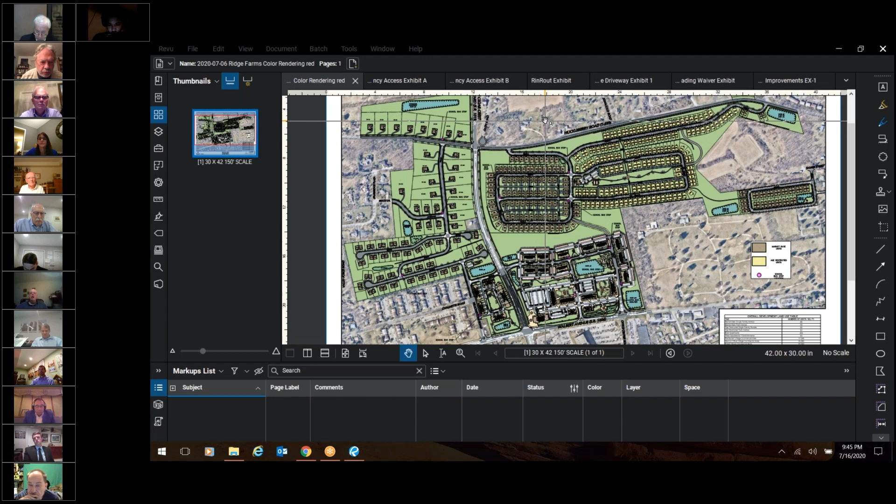Okay, Lee, this is Bill McNair. Your comment, it seems like you might be in favor of the connection to Valley Forge Road. Yeah, I think whatever we can do that's safest for our emergency personnel is probably the best thing, because you've got a 15-mile-an-hour road that's narrower and on a grade. Granted, the road to Valley Forge would be on a grade also, but it would be more accessible for emergency personnel coming to that area.

Especially with Greenewald's Fire Company using Huckleberry, that would give them another access to respond to the west. The more access they'd have, the better, in my opinion. They'd have to come up Springhouse and go out Walbert to get up that way. They could get there a lot quicker than going all up through Cedar Crest and up to Huckleberry and down and around.

I didn't catch all that, but Greenewald's would be coming out Huckleberry from— oh yes, I'm sorry, I'm thinking Cetronia. Sorry, everybody comes— don't get me wrong. The closest would be Greenewald's; they would come that way, then Cetronia would come from Springhouse, and Woodlawn would come down Walbert. Correct. Yeah, okay.

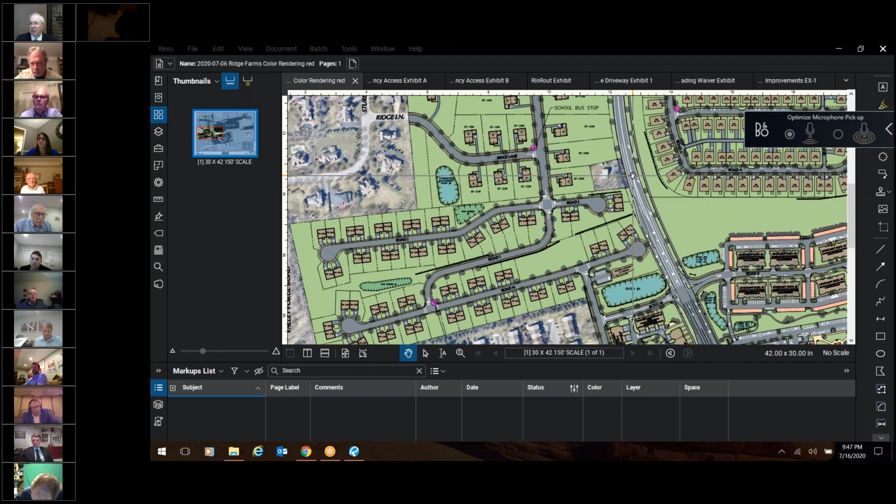Okay, thank you. Okay, next question—Monica Hodges has apparently a follow-up question. Monica, go ahead. Hi, this is completely unrelated to my husband Rob—he asked questions earlier, so it's my turn. Thank you.

I just wanted to clarify—did you say that on the two cul-de-sac bulbs, there were 15 homes allowed by the SALDO and 26 homes requested by the waivers? Is that correct, did I hear correctly? Is that a yes? Yes, that's correct. Okay, thank you very much.

Okay, so I have two questions and a comment. Chalmette Road—will there be any type of traffic control? That is a more quiet road; it will get some spillage. There are a lot of kids in Country Crossings. What will be done to the road there to help ease traffic and enforce speeds?

The second question is, is it possible to wait for the comments from the LVPC before proceeding? Because I feel their input could be really important. And I hope I didn't misunderstand that.

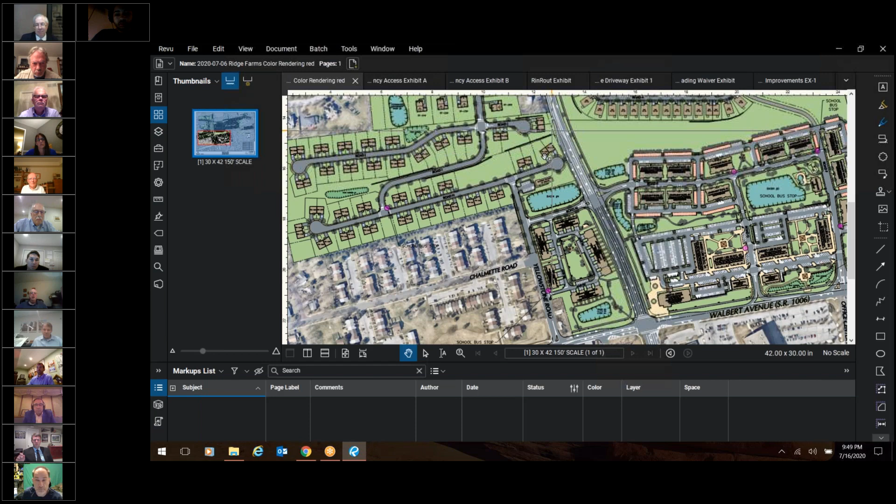The third thing was just a general comment. I've said it before at other meetings, and with all due respect, Attorney Preston, you are talking about the uniqueness of the property and how the SALDO needs to be tweaked to enhance that uniqueness. But what I'm hearing, and have been hearing, is road grades, entranceways, increased traffic, overburdening Huckleberry Road. I feel sometimes we're trying to put too much into this very unique and beautiful property. We're trying to put a puzzle piece there that perhaps doesn't fit quite well.

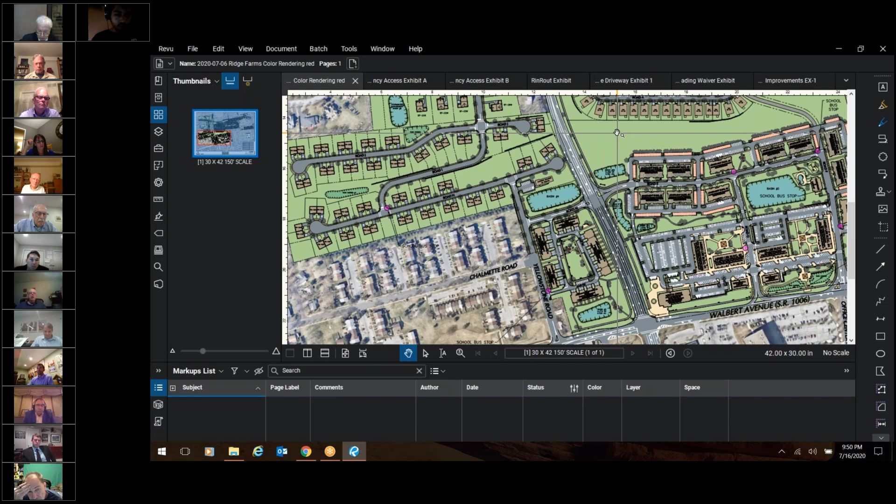Why not, in those two cul-de-sacs, instead of putting the 26 homes you requested, make them 15 single homes? And why not do the same thing at the upper part of Huckleberry on the east side of Cedar Crest—why not make more single-family homes rather than cram all those townhomes in there? I know the response is because it's zoned that way; our commissioners from years ago zoned it that way. But I think real talent in a developer can accommodate the plan and fit it into this very hilly and challenging property. And just because you can, it doesn't mean you should. Thank you very much.

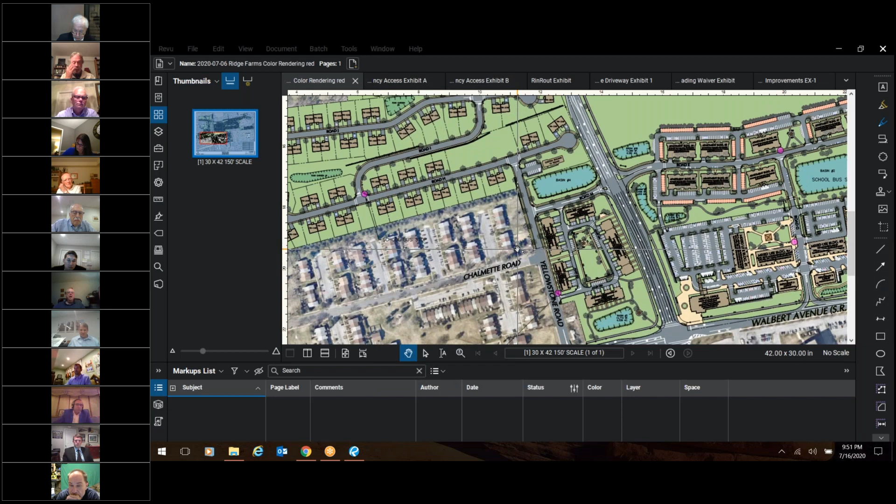I can address one item there on Chalmette Road. There was discussion with public safety about adding a traffic calming measure along that roadway. The developer has agreed to work with the township on that existing roadway, and we're not sure what that measure would be at this point, but they're open-minded to assist with a traffic calming measure on that roadway. Thank you.

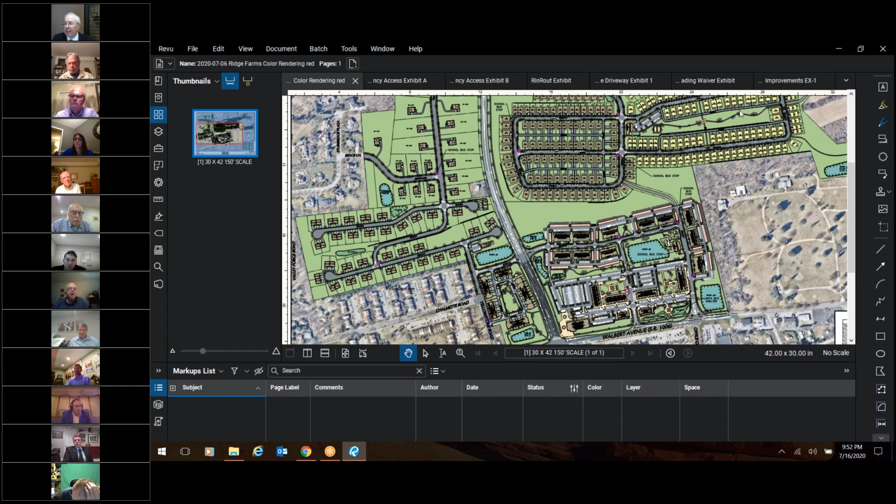Okay, next up we have one more, Jacob Roth of 1499 White Oak Road. He asked, I would like to make a statement during the public comment. Jacob, if you're out there, now's your time. Yeah, this is Jacob Roth. I have two things I want to mention.

The first is in regards to the Western driveway waiver request. The applicant tonight said that PennDOT has approved the traffic study, and they also imply that they approved the driveway. I just have a question of the applicant. Is there, either in that PennDOT approval of the traffic study, an explicit statement saying that they approved the driveway? Is there a clause? Is there an additional document? Where in that document does it specifically say that PennDOT approves the driveway? I know that they approved the traffic study, I get that, but where does it specifically say that they approved the driveway? That's my first point, and then I have something else after if I receive an answer to that.

Sure, I can answer that. Within that letter, within the TIS approval letter, it doesn't just say that the traffic study is approved. It goes through and documents the basis of the traffic study, and then outlines the specific roadway improvements that PennDOT is expecting to see as part of the development, as outlined in the traffic study. It goes through item by item, lists them, and one of those is the right-in, right-out driveway to Walbert Avenue. So that's what they recommend, but are you saying that driveway does have PennDOT's approval explicitly, without a doubt?

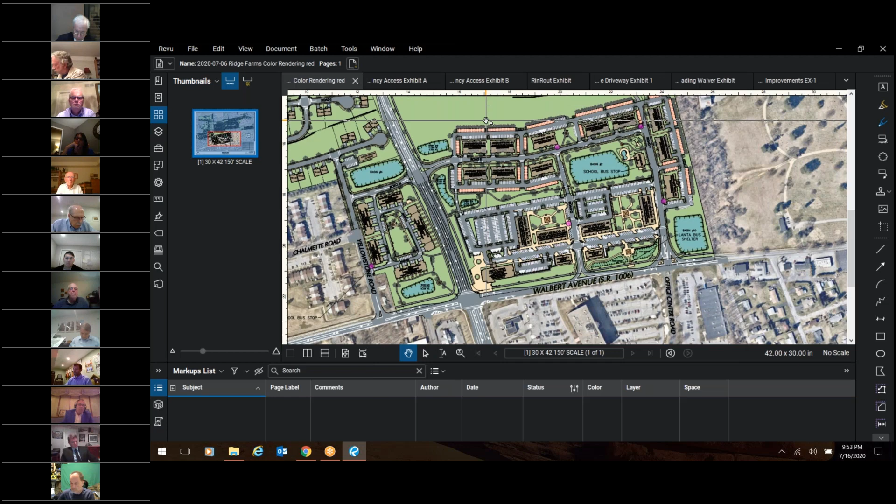Tonight, the Planning Commission is being asked to approve these waivers, and some would like to make it out for the public to believe that the Planning Commission has to approve what PennDOT has approved, or that in agreeing with basically what PennDOT has said, the board or commission must also approve that. I want to make it very clear to members of the public and also to members of the commission that you do not have to approve something just because PennDOT gives it their approval.

You are essentially accountable to either approve or disapprove of the waiver. If you feel that it does not meet our SALDO requirements, you do not have to approve it. The only entity that the commission is beholden to is the public, not the applicant, not PennDOT. You are your own government entity. You only report to the people of your community, not to PennDOT, not to the applicant. I ask the public to keep that in mind as they talk about this project.

I ask the applicant to keep that in mind. And I also ask the commission, most importantly, to keep that in mind, because you are only beholden to the community. I hope that you make decisions in the best interest, not of the Department of Transportation at the state level, and not of the applicant, but of the community. And that's all I have for this evening.

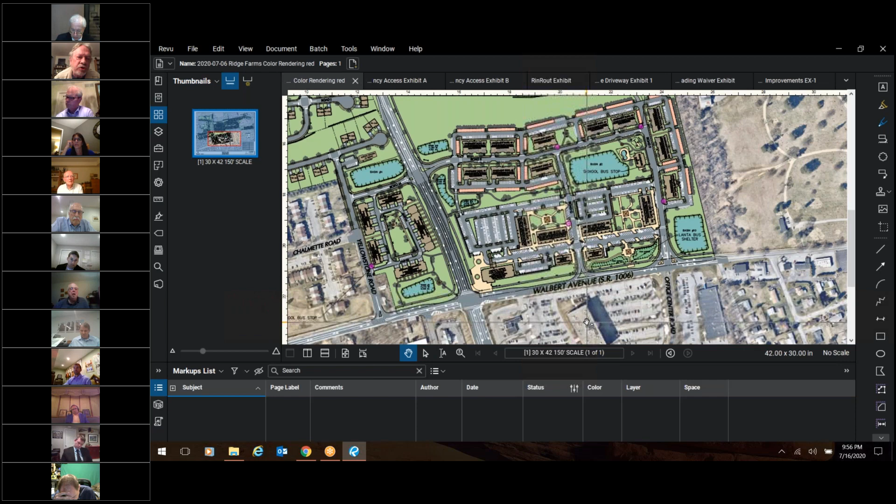Can we discuss that topic? So if PennDOT approves it, you're saying that overrules our ability to deny a waiver as a planning board? No, it does not. Okay, I misunderstood. What you're going to do on the PennDOT road is controlled by PennDOT. We can't overrule PennDOT and say, no, we're not going to do it your way, we're going to do it another way.

This is Jacob Roth with the follow-up. I wasn't in any way insinuating that you would overrule what PennDOT requires in terms of what they lay out. I was just saying that you do have the ability to overrule or disapprove of a waiver. I wasn't denying that you were going to overrule PennDOT, but that you do have the ability to approve or disapprove a waiver. Okay, understood.

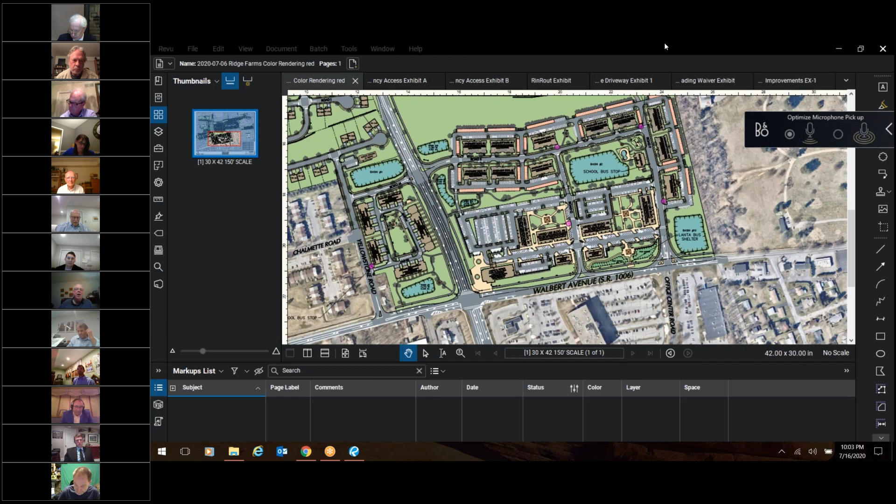Instead of worrying about a bunch of old people living on the hill, you might want to worry, like for Jacob Roth, where our young people are going to have open space. And by the way, you might want to think about agricultural education, because we're losing it very fast.

Sorry, I'm upset, but I'm upset with this whole thing. I've had it. I don't care what the developer wants. It's not fair to us. It has never been fair to us. And all you want to do is accommodate all of these people coming into the area—all this traffic, all this pollution. I don't know where all these animals are going to go, but we're on the Atlantic Flyway.

You already made a mess of Rutz's farm. It's a disaster over there. And you three-laned Walbert, and it's a mess. Now you're going to do it over here and add tractor trailers. And by the way, all these tall buildings throw shadows.

There's nothing but sunlight and clean air over there. Where's your carbon capturing? Where's any of it? I guess you don't want to discuss that.

It's disgusting. It's been disgusting. I worry about it every day. I'm 65 years old, and I get to look out my window and see a mess instead of greenery. You want to act as if the only thing that matters is, where's the park? Oh, there's your park and there's your open space, and the rest of it we got to accommodate the developer. Really, really.

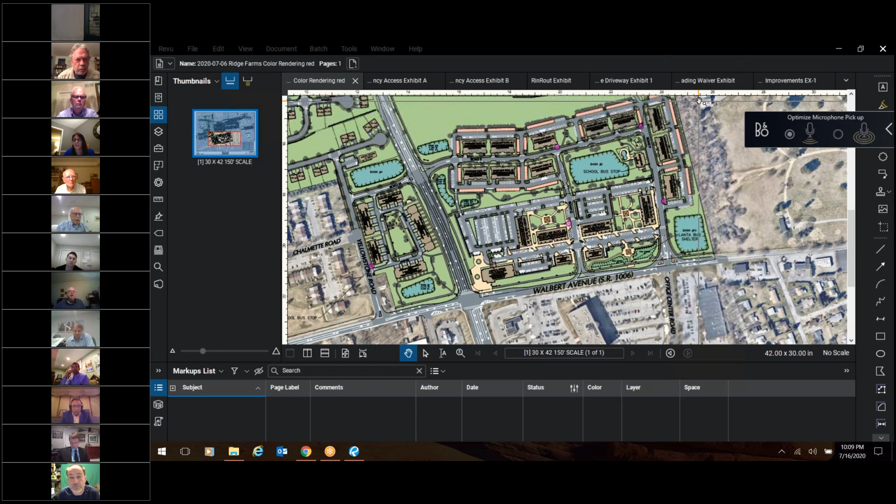Well, at this point, should we make a motion to table this for further information? I think that's a good idea. I'll make that motion. I'll second, before we vote to table.

Greg, do we have the necessary waivers available and signed? A time extension? I have to ask either Jason or Jim if they'll be willing to grant that. I'll let Jim answer that. That's above my pay grade. Sure, I'm gonna need a minute for that, if you don't mind.

And that would be what, a 30-day extension? Is that what we're looking for, Greg? Well, our standard is that you'll resubmit a plan within 6 months, and resubmission of that plan restarts the clock. No, I didn't understand that.

We're trying to get an answer on the waivers. It seems the planning commission wants a letter from the Lehigh Valley Planning Commission. In order to do that, that can't take 180 days to do. No, their standard is 30 days. They have 30 days from when they accepted it, so whenever it was officially paid for, that's when their clock starts.

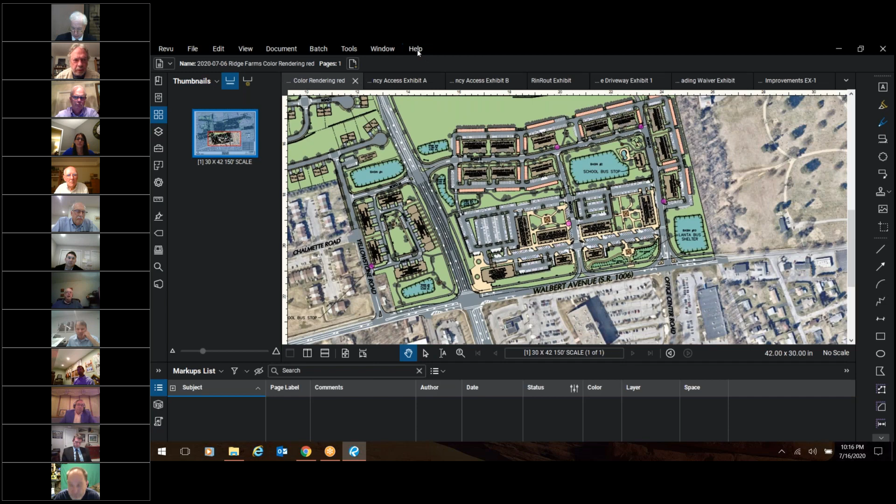So we have a motion and a second. That was a motion to table, take it under advisement. So we'll take a vote. All in favor? David Dunbar, aye. Brian Height, aye. Diane Kelly, aye. Bill McNair, aye. Alan Tope, aye. David Wilson, aye. Motion passes 6-0.

Okay, thank you, appreciate it. Thank you, have a good night. Good night, thank you.

Do we need to do anything with the annual report, Greg? Yes, we have to give it our blessing. We need a motion to forward this onto the Board of Commissioners. Is there a motion? Second. Third, Kelly and Dunbar. Is everybody in favor? Aye, aye, aye, aye, aye. Anybody opposed? Okay, that passed unanimously.

Any more? I don't think we need to do the transport. Is there anything on the transportation infrastructure update that needs to be done tonight? I have a short report, but if you choose, we can do that next month. That's up to the pleasure of the board.